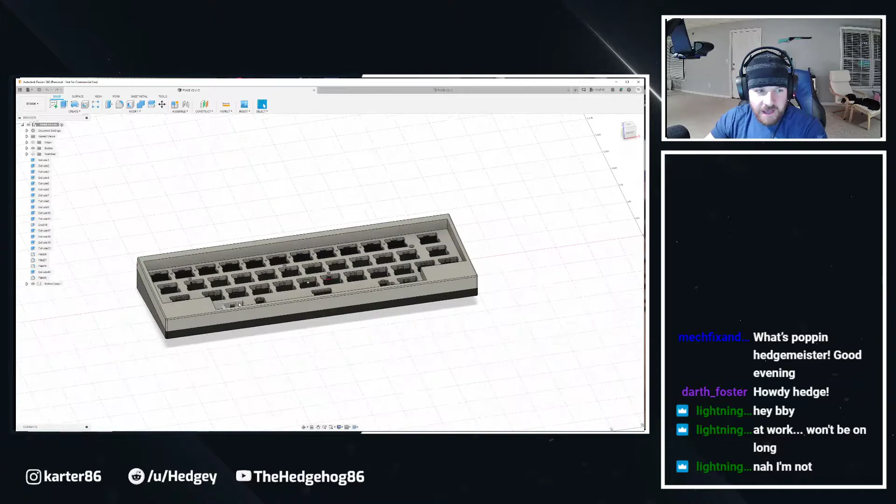So you can see I actually have the case I designed over the weekend, but the issue with this case is I cut off the 1U right here, and I didn't want to now that I look at it, at least not for now. And Fusion doesn't like playing on a curved surface. It won't let you model or design on a curved surface, so it creates issues when you're trying to do more stuff to the case. So I think tonight we're gonna start from scratch again, but I have all the measurements, so it should be relatively quick. I'm gonna show you guys how to extrude, how to do all that fun stuff relatively easily. So we're gonna start fresh.

We're gonna upload. Actually, I should have it in the admin project, I think. Got a bunch of stuff in here. And I believe it is this one. Yep. So all I did was take the jet van plate and modify off it. As I said in the chat, this is an integrated plate. So I literally took what we already had and started working off of it.

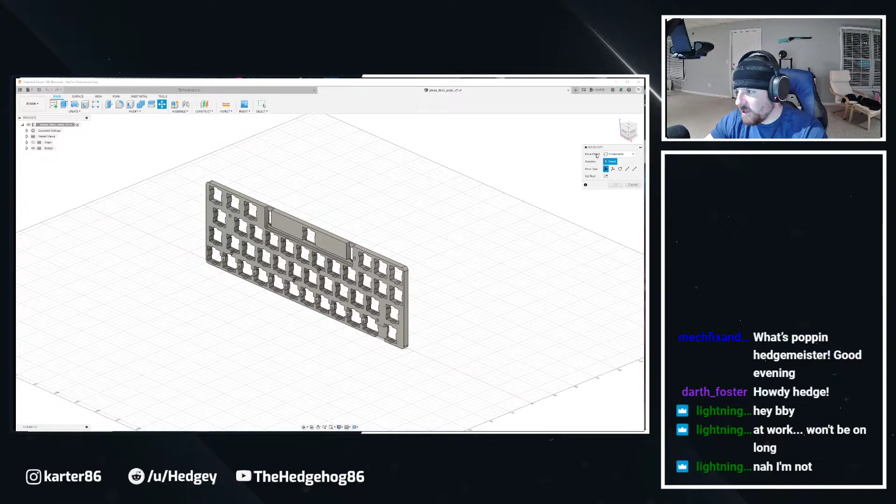So first thing I want to do is move this. I just realized I opened this as an editable document. Let's close that out, that's fine. We can always rename this, but the first thing I want to do is select the entire body, and then I'm gonna move it. We're gonna move the body. There we go. We're gonna translate, I think. No, first we're gonna rotate, that's right.

Right, so actually I can rotate, sorry boys, I can rotate off the bottom. So let's do it off there. There we go. Oh, wrong way. Oh, but it translates wrong. How did I do it last time? Did I do it from the top? I must have done it from the top. That's alright. Then we can move this flat. Okay. So I've got this floating design, okay, now we're gonna translate.

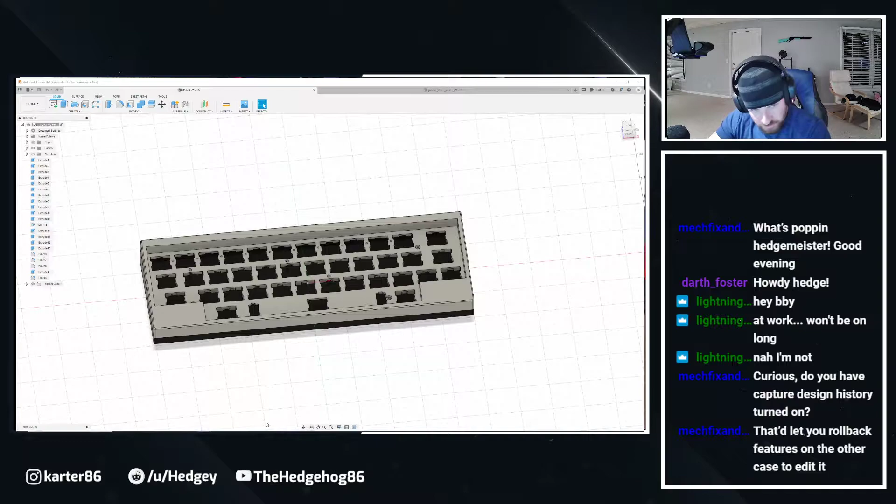I should be able to put this down. Curious, do you have capture design history turned on that lets you roll back features? Yeah, I do. I don't remember how to pull it back up, so what's funny is you'll see it start showing up in here, but thanks for the reminder on that. I meant to do that earlier. Because I can still edit like on my other one. You can see all my extrudes here. All my sketches are here. It's just not putting it along the bottom. So I gotta remember how to do that. I'll do that in a second.

This is almost there. M for move. Take bodies. Let's go. God, trying to get this right is a pain. There we go. Let's go -1.5. I think that's it. There we go, that looks right. Nice, we have it on the ground. Oh, look at you, MechFix.

Yeah. Can't remember how to do that. Actually, this is a good reason to pop over. Sorry, you can't see it. It's on my web browser. Fusion timeline missing. Which, by the way, Google obviously is the ultimate help when doing this stuff. So if you get into this, Google is the best thing in the world. So option capture design history. Interesting. Looks like it's here. There we go. Design history. All right. See, Google solves all.

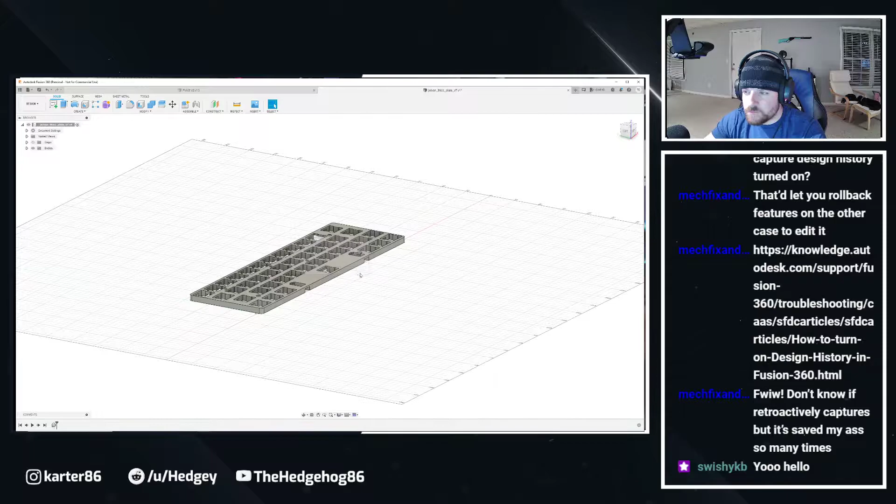So we just started. Just brought in the jet van plate, and like I said, I've got some measurements, so I'm going to work off of those measurements more than anything. And one of the first things I'm going to do is obviously save. I don't want to save the plate though. That's right, I can always pull in the plate later. So this is supposed to be V3. Yeah, I'm good, Swishy. PC, PV, KV, V3.

I am actually excited. I am headed to Dollywood tomorrow. So that should be exciting. A little roller coaster action, getting up early, driving up there with the pops. Should be a lot of fun. So,

All right. So we got the corners to lead off the plate, or the fillets, I should say. Like I said, I've got my measurements here. These were all handwritten this weekend. I know roughly how big I want the case. And like I said, I've already 3D printed the top. And for the most part, the top fits. There's only a little bit that doesn't work right. Here.

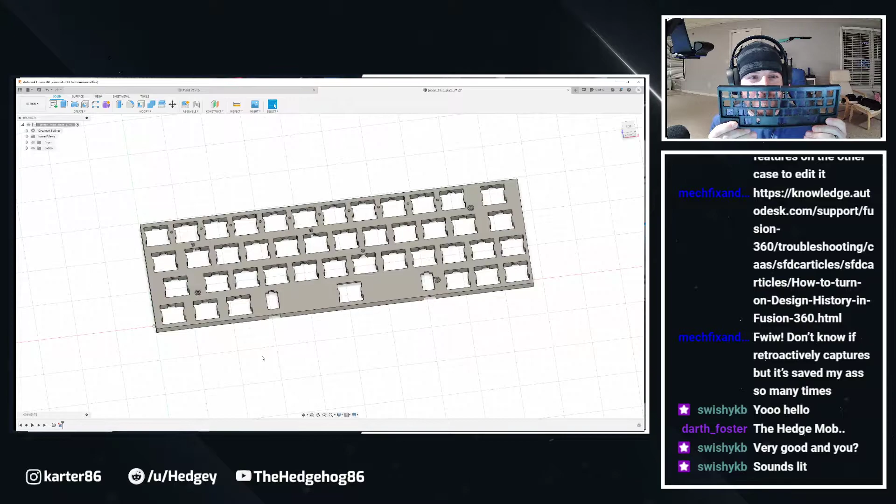And again, apologies if you hear the 3D printer in the background, if it's loud. It's been running 40 some odd hours now. But because the Ender 3 isn't big enough to support 12U or larger layout, I had to split it in half, so I printed it like this. But I've got the curve going the way I want it, which is very HHKB-esque, right? I think I posted a picture in Keyboard Design that I was looking to make that same curve.

So my issue is that this last weekend when I was designing, Fusion doesn't like working off a curve. So the very last thing I'm going to do is do the curves and use a tangent arc with 3 points, which once I figured out how to do it that way, it led to, okay, now I know how to do it as an overcurve, which means some of my other designs that I've been struggling with are all coming together a lot better, which is super exciting. So now I'm really kind of grasping a lot more in Fusion. There's still a lot to learn, but I can get by on the basics, which is great.

So let's do this. Which, I should ask if you guys want the hand cam as well. But now we want to start extruding, and that's all Fusion is: extrude, extrude, extrude. If you don't know that, start with a square and keep extruding.

So I know for a fact that on the left and right side of the case, I need at least an additional millimeter of room for the keycaps between where I start extruding upward vertically for the case. So if I know that, and I know I want the side bezels to be 3.5 millimeters each, we're just going to extrude 4.5 millimeters, and that'll bring that part of the plate out. You can see the difference there. And then I'll do the same thing on this side. So E for extrude, 4.5, perfect.

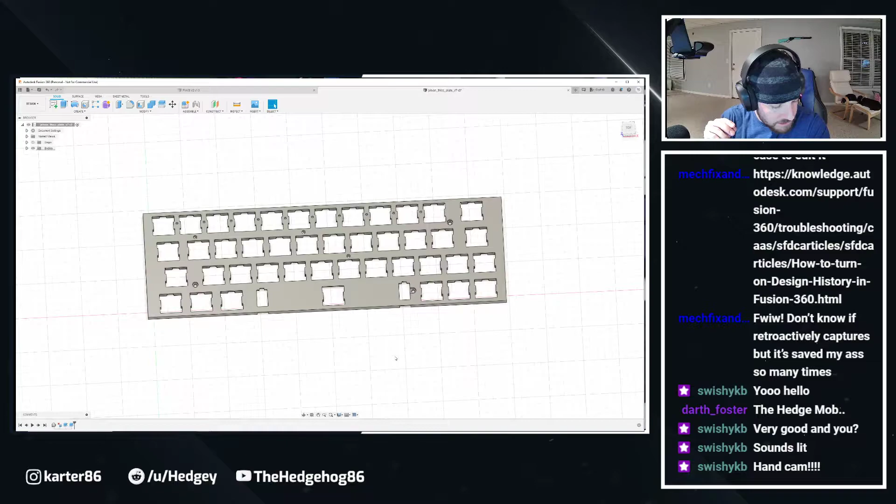And again, this will allow me to create a line back 3.5 millimeters, and I can raise the case from there. Total case height, the back of the case should be about 32 millimeters, give or take. And then the front of the case should be somewhere around 18 millimeters. So it's going to be like a 5-degree angle. The HHKB is 7 degrees, I believe.

Hand cam, he says. All right, let's see if I can do that. Bear with me here. Let's do this so I can move things around. So we'll take the Logitech cam. I'm going to shrink it down here. We'll put it right there, and let's see. I think I have to move this above monitor 1. There we go. Nice. So you won't be able to see the mouse, which I guess the mouse is what you guys want to see. There we go. How's that look, Swishy? Is that good? So you can kind of see everything.

All right, so we've got the sides extended, and I believe I did the same thing for this other case. So what I can do is do a measure, even with the fillet, that's fine. So we're going to click S for search, and then measure, and then I'm going to measure from here to, well, that's not going to work. Let's try this again. Awesome, perfection. Glad you're happy. Yeah, 4.068, and that's angled down, so it's 4 roughly. So okay, we can go back to my other design.

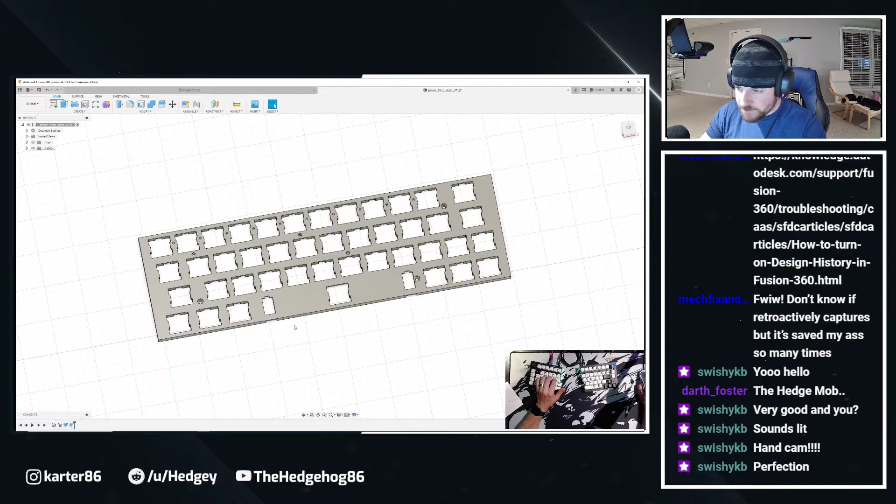So we know the front, I made 4 millimeters. We're just going to go ahead and extrude this out. 4.5. I think it's 4. Did I say 4.5 or 4? I think it's 4. Because that was at an angle, which means it should have to reach a little further. So, all right, it's 4.

Now I probably don't do this the right way, but I want to create the bezels and bring them up. Like I said, the very last thing we're going to do is draft and then curve the case. So realistically, I'm all about the bezels right now, and then we'll work on the bottom case right afterwards. So I'm going to click this body, the top face, search, sketch. We're going to create a sketch. Let it load. There we go.

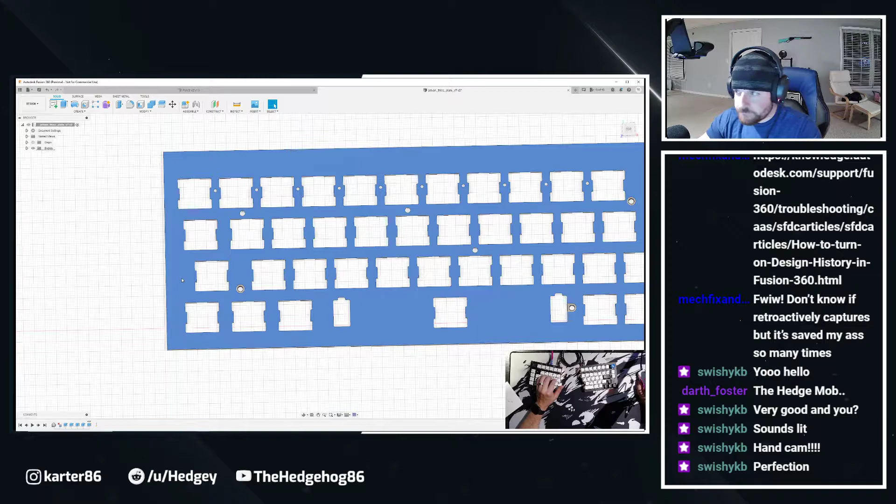All right, so the first thing I want to do is search. We're going to do a line, and like I said, side of the bezel, 3.5 millimeters, so 3.5 to there. Then we're going to draw a line up, 90 degrees to the top, and then from there to there, and there to there. Now, what I could do as well, and I will here, is I can knock out all the sides at once. I don't have to do one at a time.

So I'm going to go ahead and click this, and like I said, the rear bezel, we wanted 9 millimeters. I made it 10, so I had a millimeter of space between the top of the keycap and the bezel itself. So we'll come down 1 millimeter, click, and now we'll go right across 90 degrees to here. Perfect. Same thing, 3.5. Click. Bring this down. 9 millimeters, right? Oh, I went backwards.

All right, so here's the beauty in Fusion. You can always undo. And undo one more time. I was thinking backwards. That happens a lot. So line, we're going to go 9 millimeters. That's right. Not like the gun. And then click, and then we're going to come across 90 degrees. And it'll snap to rotation, 90 degrees, 180, whatever it is. It'll snap to that, which is awesome. So again, here to 3.5.

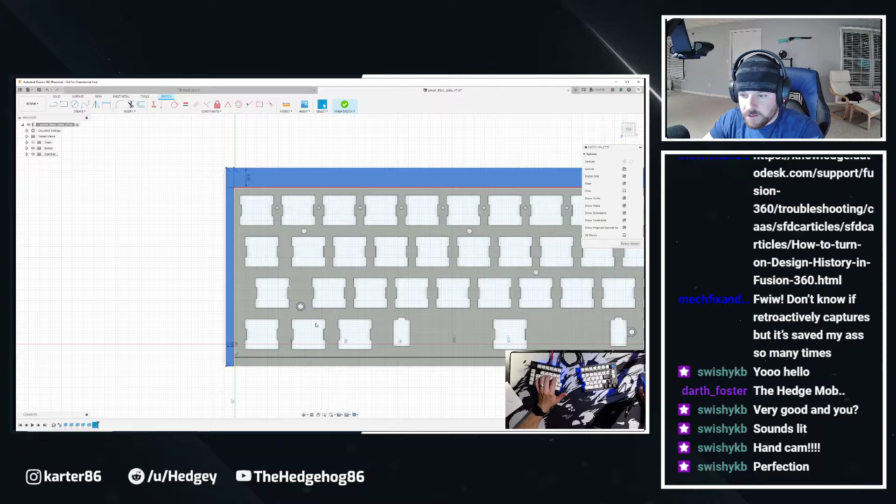I can basically click, hold shift when you want to multi-select, here, here, and here. Oops. Sorry, boys. Rotation gets a little funky. And then we're going to extrude upward. And I said the total height was 32 in the back, but I already know that the plate is 5 millimeters. I know I need the top to be 11 millimeters. So we're going to extrude 6 millimeters high.

And I think 6 worked. I can always go back and check. I had to do some additional calculations, if you will, here, but let's just double check. This is why I keep this one open. Yeah, see, so it'll be a little higher when I'm done with the arc. I think I did 2 millimeters up, but either way, we can start with that.

And I know that this height with the case as it sits right now is pretty close. I probably want that more to 7. So we'll change that when we get to that point, but it's always good to have reference material. If you have it, you can always measure and go back. So for now, I'll probably just go ahead and extrude this up one more millimeter. And we'll just have 7, and that'll be good.

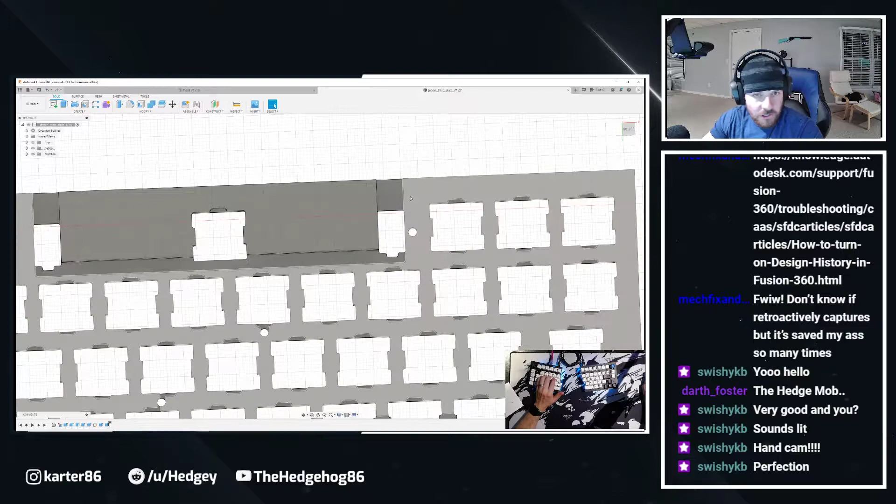But look at that, already there in just a couple of steps. I've got my integrated plate, I've got bezels, and that was super simple and easy. The nice part too is it's already got the USB cutout. We're gonna delete this switch plus these two because we're going for the HHKB look, right? It'll be asymmetrical, which is kind of the goal. And then what I'm also gonna do here is draw a line and close up this basically, so that there's no hole in the front of the case. So I'll probably go ahead and do that now.

So we're gonna click here, sketch. We're gonna create a line. Oop, yep. And then I said I extended that front of the case was 5 millimeters, so we can bring this back 5. That should fit. Let's give it some wiggle room just in case for the stabilizers. So 4 millimeters, come across. And then we're gonna do the same thing over here. Oops. I think I can only do one at a time.

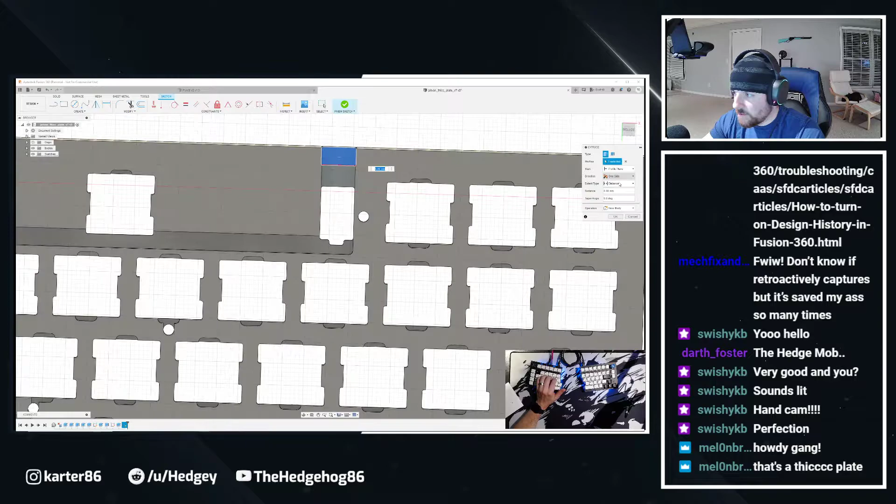Okay, and then we're gonna escape. And then extrude. Extend type to object. Let it load. Yep. Hit enter. And look at that. Now I've closed off those. I've still got room for the back of the stabilizer, but I've closed that off, which is awesome.

So now we're going to get rid of this switch. There's a couple ways to do this. I can literally just straight delete this, but here's the issue with that. When you start doing that, you got to work around the views and stuff. So the other problem is you have to select all the faces.

I really should try a trackball with Fusion. I hear it's awesome.

Oops. All right, so it should be like 18. So right click, delete, boom, closed up, perfect. Oops, sorry. Yeah, oh my god, the rotation gets a little wonky. Sorry, boys. So yeah, so there we go. We've already got that one completed. I'm gonna do this same thing for this other switch right here, because that's what I've got going on in the design.

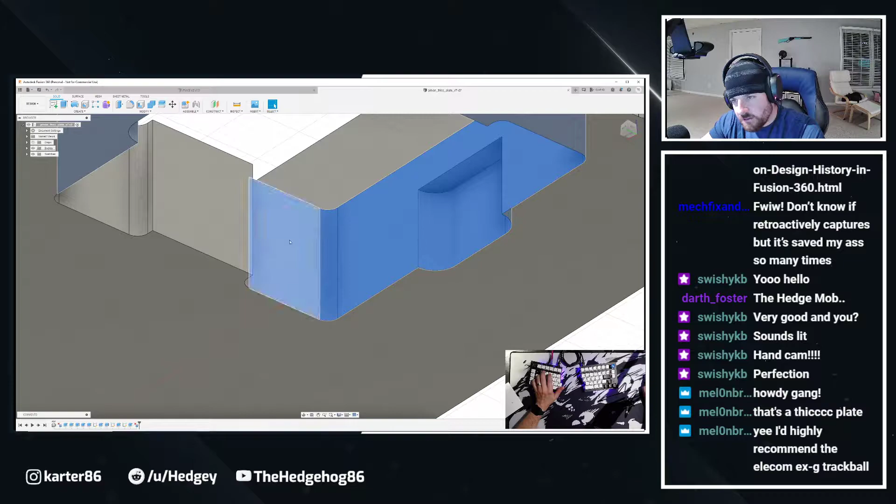Oops. Whoa, yeah, how do I make the Elecom EX-G trackball? Right now I've got upstairs at my work computer. There we go, I've got my Perixx, the 720. It's a thumb trackball, super nice, wireless. I actually really like that one.

Couple more faces to select, and then we can delete all this, which is awesome. Like I said, I've been doing this design all weekend, so knowing what I want to do here is super helpful.

What I really need in here is Taylor to come judge me. Just create some unnecessary pressure, you know?

Look at that, perfect. Okay, so as it sits now, this is how I have the layout in the KLE, but not how I have it in the renders on the interest check channel. So gotta tweak this a little bit, or tweak the renders in the interest check channel. But hey, it's all good.

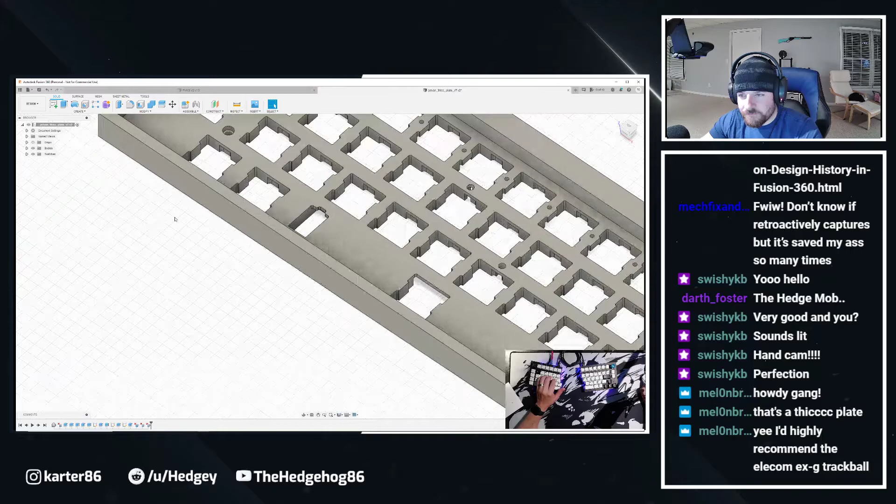So now I want to create some blockers and get those knocked out. At least I think that's what I want to do. The other part is doing the case, the bottom of the case too, but we'll get to that in a second. So again, I'm not modifying anything switch-wise, switch position. All I did was delete 3 switches.

All right, so we go ahead and sketch here.

Oh, my Braves are scoring again. Have any baseball fans here?

All right, so I know I have a millimeter of difference, but that shouldn't matter. So we're going to go with a line. We'll go 19.05. We'll go here.

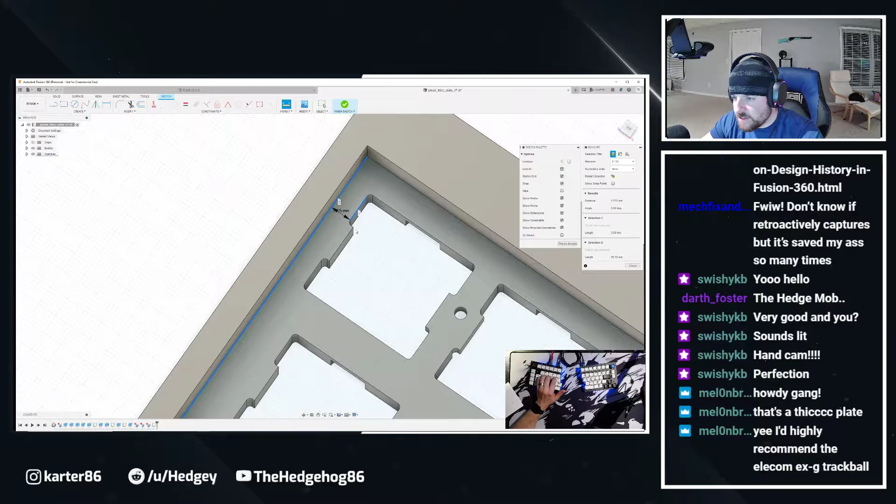Oh, this is where it gets a little wonky. Hold on, I gotta remember what the distance is between the switch and the bezel. So here, let's do this. Let's measure this line to this line. What's that say? 2.725, okay. So I want to create a line from here to 2.725. That should be the distance.

Okay, so now I should be able to take a line here. Oh, you know what I should do? Yeah, and if you guys haven't realized, Fusion is literally just drawing a bunch of lines. There we go, so that should be the first blocker. And I should be able to...

Oops, sorry. Should be able to take it to there. Click there, all the way to the corner. So what I'll do now is I will delete this line, I will delete this one. There we go, and now I have a blocker. And we're going to extrude, excuse me, to object.

Look at that, that looks like a good blocker to me. So pretty simple, and we'll do the same over here. So, sketch. There's a lot of repeating motions too in Fusion. So we'll take it from here.

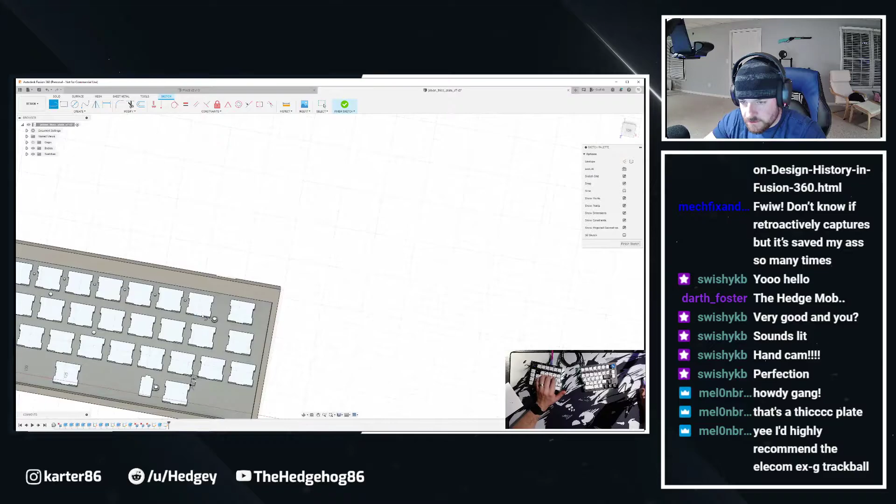I say 2.725. And then just bring this up just a little bit so I have enough. Okay, escape, line. Which point are we rotating off of? Alright, I'm struggling. Oh, okay.

Oh, and I still gotta move this over, I gotta translate it, I haven't done that yet. Alright, so here to 19.05. Okay, and then bring this to here, 90 degrees. Nope, that's 89, that's 90. There we go.

Down to there. Oh, it already has that as a... weird. That's okay, I still want to do one extra line from here to here. There we go, okay, let's go ahead and delete that. Extrude to object.

There we go. And you guys are quiet tonight, are you just watching and learning? That's about as asymmetrical as it gets, right?

Let me show you something. Alright. Just ripped my headphones out of my stand. So yeah, so...

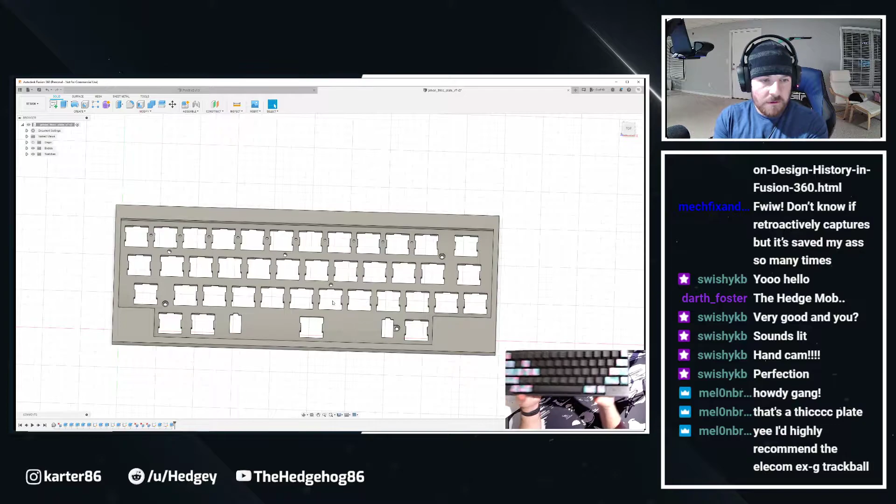Speaking of asymmetrical, sorry, harsh light, you can see the blocker here. Let me do it this way. This blocker is longer than this one, and then you'll see what I'm going for on the case. I'm going for that curved look eventually.

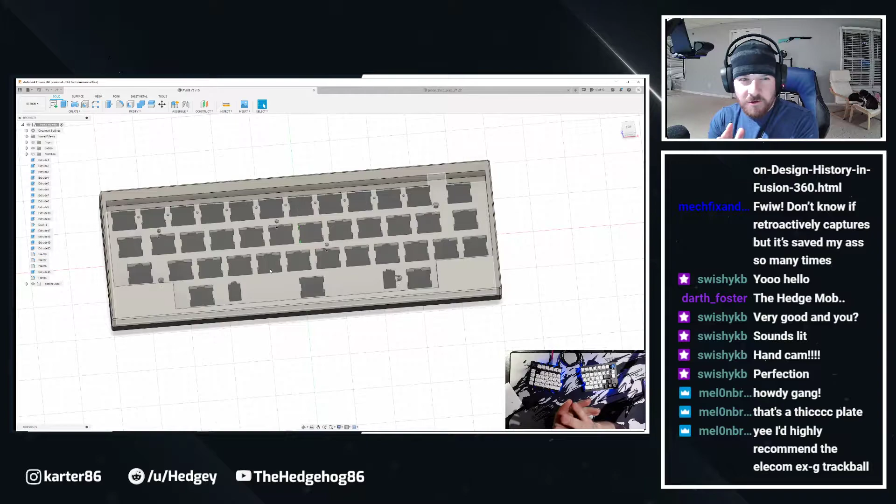I kept the screw holes the same size. I don't think it'll matter because it's an integrated plate. I actually don't think I'll need the screw holes to hold in the PCB, if they're held in by the switches. Someone correct me if I'm wrong, but I'm pretty sure I won't even need the standoff holes, which is nice too. It means the PCB won't be resting on standoffs.

I saw it. All right, let's create a new component. This will create under the main project. We're gonna call this bottom case, and we're gonna go from the body. Okay, we've got our bottom case started.

So what I can do now, I believe, is extrude. I'm just gonna start with this. I could probably create a line and go around and make a square, but I'll probably just extrude downward.

I know the top of the case is 11 millimeters at the moment, roughly. I think it was 12 total. That's it, I'm refunding my oceanographer. Thanks, Swishy. So I know I want to get to 32 millimeters in height. That's what I came up with. So, some quick maths.

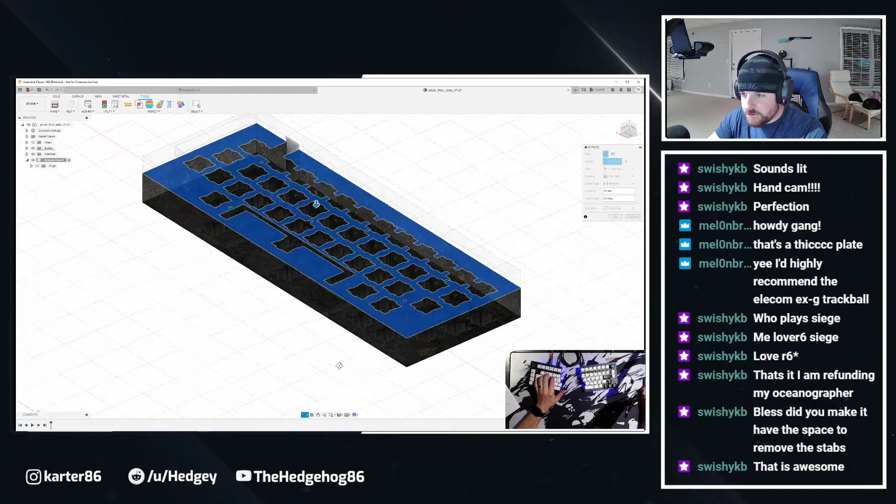Bless, did you make it have the space to remove the stabs? What do you mean, like right here? What did I say, 21? Yeah, 21. Ugh, I don't know why it makes that material not the same, which is so weird.

I hate the way that looks, that's so strange. Oh, and I still gotta move this thing over. Well, I guess it only matters if I want to print it. That's also why I can't rotate around the center very well. So let me do this.

Physical material, let's pick. We'll pretend it's metal for now. Like if I unscrew them, can I just remove it? I don't think so, I may cut holes to do that. It's just perspective, you were looking at it from the bottom, Swishy. So I would need to cut holes in the top to be able to pull it out. But that's not a bad idea, actually, now that I think about it.

I may do that, I may make a hole big enough for the stab wire to come straight out, because I don't think there's any downside to that, even with the integrated plate. So let me do that. But let's pick a material real fast. Let's just go with... it won't be aluminum, but the plastic doesn't seem to work very well. Let's go with the classy silver.

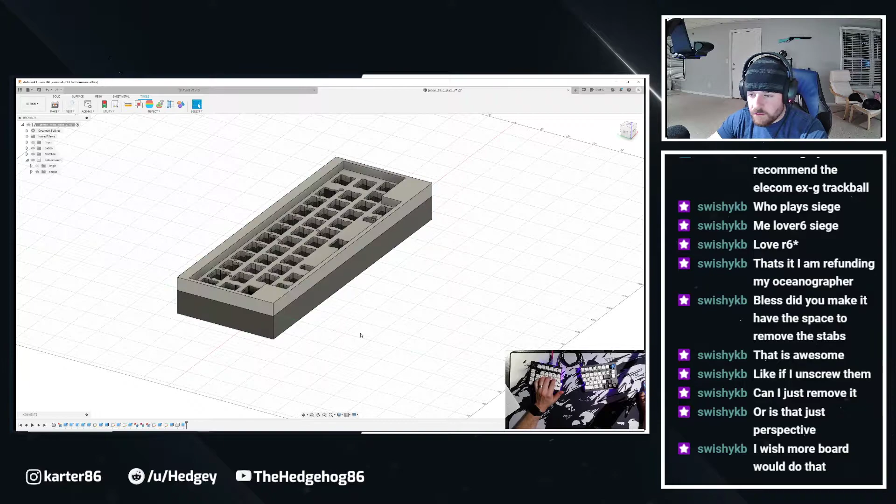And same thing for the bottom case. Close, okay, and it should... Yeah, I don't know why Fusion's been doing this, it makes it two separate colors. Can I just remove it? You could, or what I could do is go ahead and extend this. Extrude that right through, let's do that, let's come up.

So, I see what the problem is. Coming out with that switch, I have a better idea. So let's Control Z, okay, I have a much better idea. I think the stab, I gotta know where the stab wire goes, but what I'll do, Swishy, is create from where it comes out a little bit and across, a line big enough, or a hole big enough that the wire can come out. That way we can still clip in the switch, right? That's the issue, we want to be able to clip in the switch. So, and I agree, I wish more boards would do that. You can do it with the Ocean, I think, we cut the plate hole big enough, I believe. Which my poor Ocean still isn't built yet, I have no working oceanographer at the moment, not even the PC one.

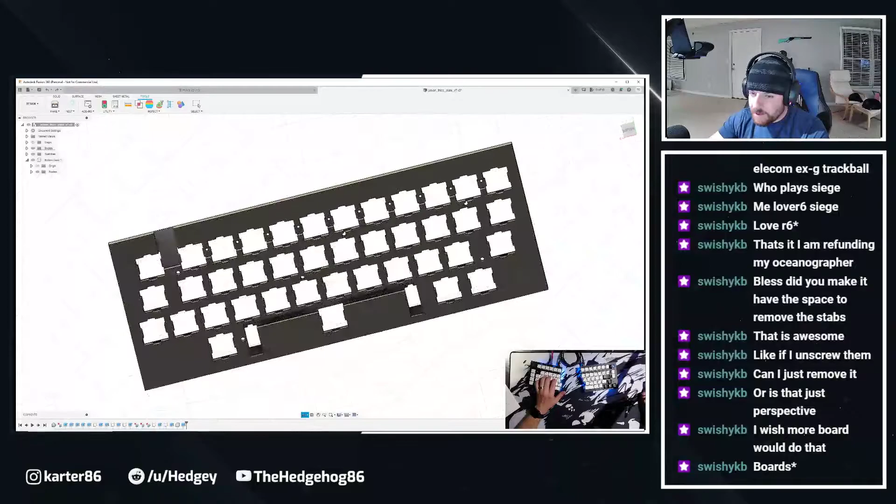So, all right, bottom case. Now we gotta do the fun part and close up all these switch holes. And the easiest way that I did that was sketch.

I'm going to go ahead and hide the main body from the top so you can see what I'm doing, okay? We're going to create a line here.

I need to remember if it's from the top here, but let's just start from here, doesn't really matter. Come across to there, and now we're going to travel upward. The switch holes don't matter. Come back down.

Hey, I love you, you doing good? My wifey, everyone, she's over here. You don't want to say hi? Okay, alright, I'll see you in a little while.

If you have a significant other, make sure you tell them you love them all the time. It's super important.

Oh, I went way too far. That's okay though, we're going to come to here. Oops, hello. Actually, let's do this. There we go, that kind of works, right?

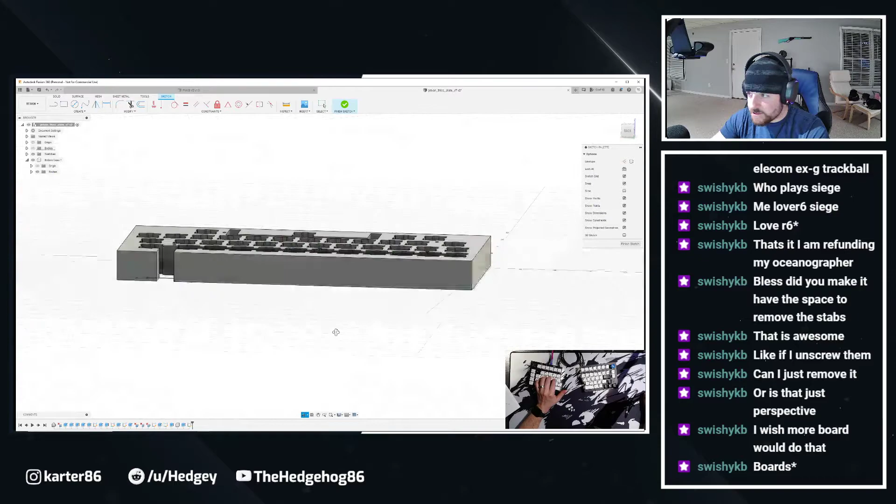And the beauty is, because this is the bottom of the case... which way am I looking at it? Oh yeah, if you ever get confused on your rotation, that's what it looks like. So it did flip me over, which is weird, and then this is more the top. So what I should be able to do now is escape, select this.

Did I screw up? No, I didn't screw up when this unfreezes. Alright, awesome.

Oops, sometimes it'll select the points. The only thing I really don't like about Fusion is the amount of times you have to click something. There's no way to say, oh, select all the switch holes. That doesn't work.

There we go, and now I should be able to extrude to object. Again, we're going to come to the top of the body.

Oh, I know what I did wrong. Oh my goodness, okay, let's try this again. It should be just these, that's my bad. I drew that line so unnecessarily around the...

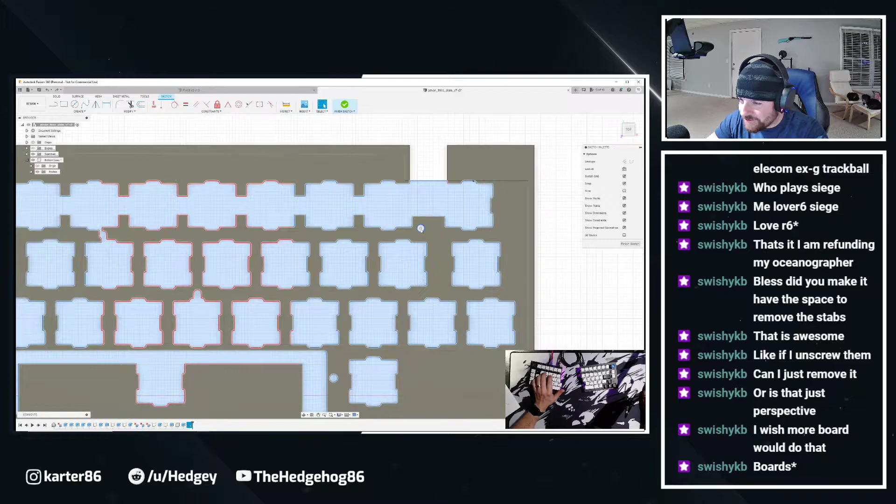Oh my goodness, it's a late night, boys. Okay, let's try that again.

Right, look, it's the bottom. Sorry, I don't mean to make y'all dizzy either, just trying to get my orientation right. Let's try again, to object.

That was funny, I don't know why my computer's taking so long to process some of this. It is dragging though. Wow.

Okay, there we go. So now with the body shown, I have a full case. And I know for a fact that I'm still going to need some space from the bottom down. I'll get to that in a minute.

For now, I'm going to go ahead and bring this hole up a little bit. So select the bottom sketch. God, a quick snap. Line here to here to here to there.

Okay, escape. And then again, like I said, all Fusion is extruding over and over and over. Let's make it 16, that'll give me

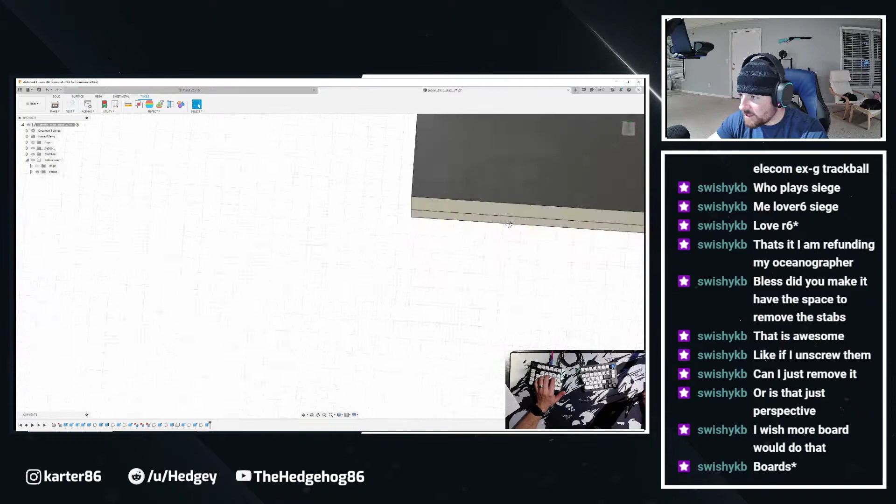5 millimeters space from the bottom. It's probably overkill for now, but let's flip this back over on its right side. There we go, look at that USB hole. Nicely done.

And what I'll probably do is cut out under there just a little further, just for the USB port, just so I have room. So overall that looks really good, and now everything's starting to come together.

So I'm just going to go back and reference my other one. Let's get rid of that body. See, so I think I made it a little shorter here. Let's go ahead and delete this just for the moment. Measure, because this is only the bottom case. Oops, I don't know what happened here.

Point 437, huh, that's a weird number. I don't know how we came to that. Okay, but now I can go back and check the height here.

Measure. Oops, that's not the right point. Is it? Yeah, it's the right point. 5, so we'll probably

extrude this down -2. There we go, a little large. We'll tweak it as we get there.

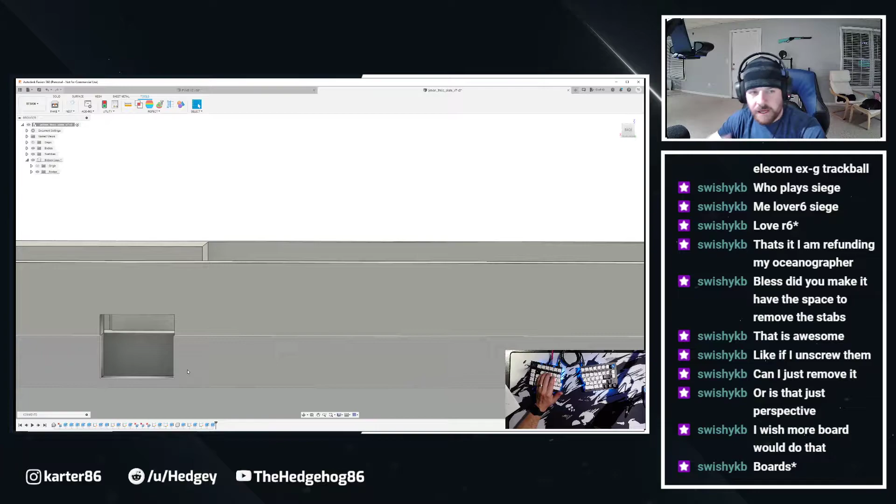I think if I remember correctly, it had to do with the drafting angle and then curving the case. That really did a number too. So there we go. Alright, so what else did I need to?

Don't want to angle. I don't think I need those standoff holes. If I don't need the standoff holes, I will be super happy. But yeah, let's just double check. What was the measurement on the back? Because this is with the drafted angle, but that's still flat from there to there. Okay, .5 millimeters. Which is probably a little too much.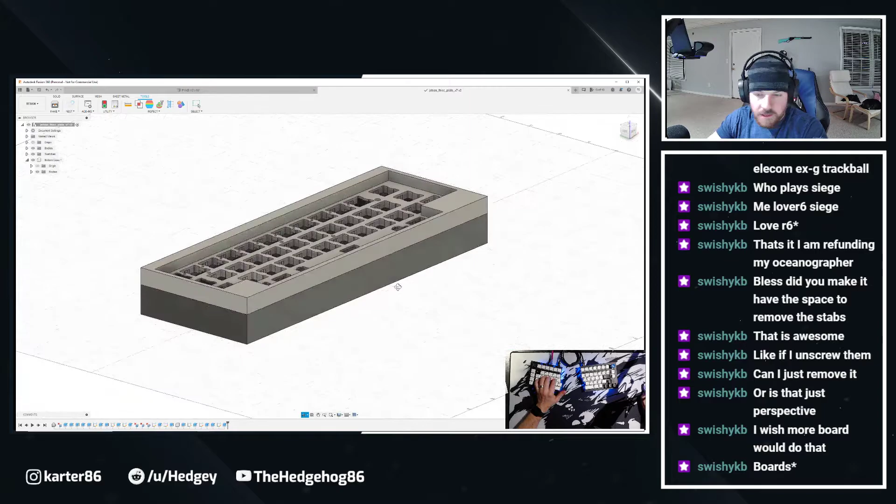And then we're going to show you guys how to draft. So S, draft. I want to pull from the front, I believe. And then I want to pull this face. Oh, wrong way, okay, hold on. So the pull direction is this way, and then we're gonna pull from this face right here. And I believe, there we go, 5 degrees. And I think the problem was going 7 was too much, as I want that to be like the original HHKB.

I believe after I did the cut to do the curve - although this looks okay, this looks like it's not going to be an issue, which is weird. What do you guys think? You think 7 degrees is too much, or do you think we should go and keep it at 5 degrees? I'm curious what you guys think, honestly.

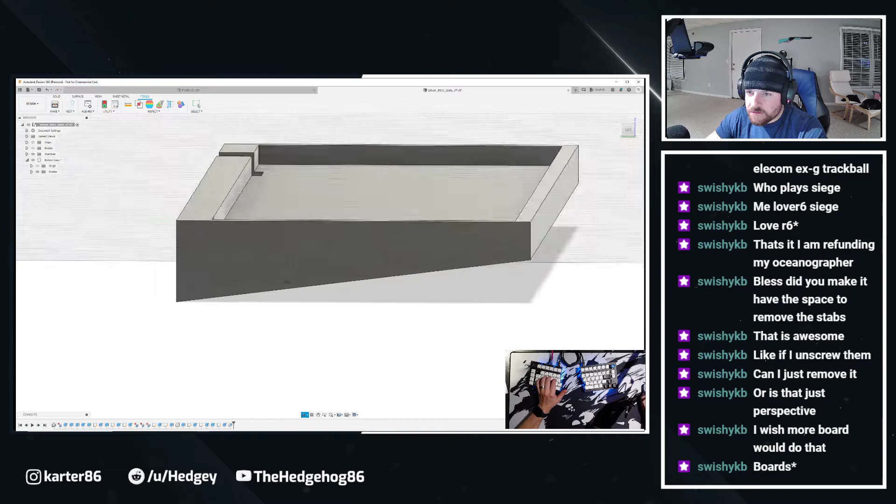Because this part of the case right here will actually come up a little bit, but I'm thinking I should keep this. I guess I can always change it. Let's go with 7, let's go an intense angle. What's it, the 7 if the OG is also 7?

Yeah, I agree, Arch. What's it, the duck boards, the Duck Viper and those other ones, they're the TCV3 or whatever, they're like 12 degrees, right? They're like break-your-wrist type angle. So yeah, let's keep it with OG, let's go 7 degrees. I think we have enough space between - yeah, we should.

Because this one was 5 degrees, that looks thinner for some reason. I guess there's an easy way to tell. Six and a half, okay. Alright, well, and how big is this one? 9.8 - did I screw up somewhere? I wonder if I got my measurements wrong somewhere. It's not the end of the world, especially with that angle - the extra height might actually be kind of nice.

So what I want to do now is view with the top bodies. There we go. And again, we're gonna curve everything, so let me just double check before I start doing anything else. I was gonna look at putting a logo right here. Do you guys want a logo on the board, like PVKB, kind of like the HHKB logo? It'd be milled in or whatever you want to call it - this is printed on, but let me know what you think.

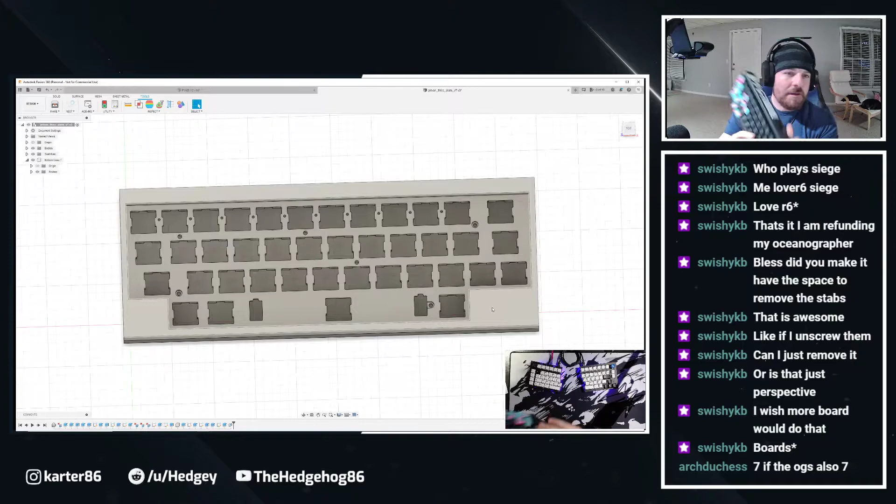I don't know if it makes it too tacky. I know the Daisy case, the HHKB case, did that, and a lot of people hated it because they put literally HHKB, like they copied the logo exactly, and people hated that. So I'm not sure. I think I want to stay away from the logo for now. You can always get a sticker or something if you want. But I think I'm going to stay away from that. So on the other board, I don't think there was much else that I needed to do.

Yeah, the Daisy logo was super... Yeah, and it's funny. Originally, Arch, I didn't like the V1 case. And then they came out with V2, and I was like, man, if you remove the logo, it looks super clean. But no. Oh yeah, I still have the HHKB Daisy case with the engraving. Yeah, it was too squared too. I actually prefer the older one now that I look back at it.

But the Tanuki also has that logo there, and I love it. Yeah, but the Tanuki was done right. It was a tiny logo. It's in Japanese. I actually infilled mine when I had it. I put some acrylic paint in there. It looked good. But yeah, I actually prefer that because it was just a smaller logo. Put a little recess on the back and ship it with a certified Hedgey sticker. That'd be interesting. Something on the back of the case, like right at the top, and just put Hedgey, something along those lines. I'd be down for that.

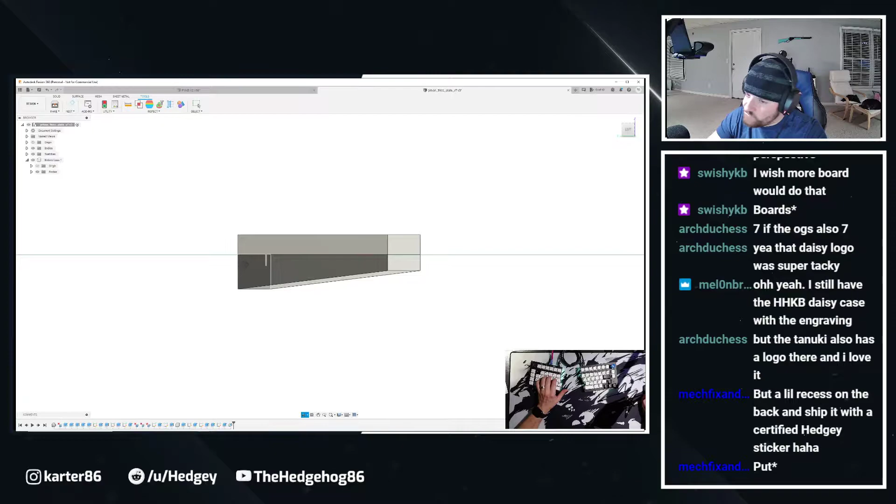I want to know why this whole case is so tall. I don't remember it being this tall. I may find out what's going on. I may have to extrude that up a little bit, but then I'm left with that weird ass gap. See, maybe I shouldn't have drafted it. And I can always go back, and the nice part is I can delete the draft. Why is this case so tall compared to this one? What did I do differently? That's so weird. Is it just there's a ton of material under here? That's too much material, right?

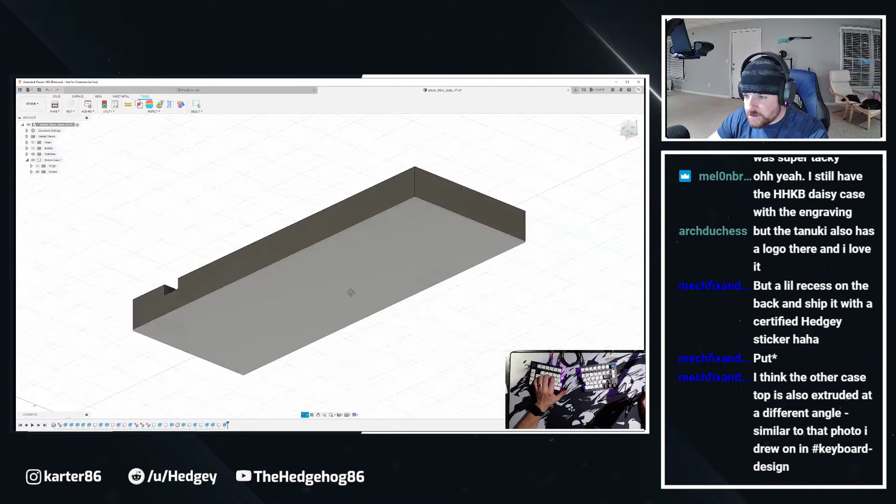If the total height as it stands right now is 21 millimeters, minus 5 is what? 16. So I've got 16 millimeters underneath there to play with that I don't need. It's just extra material, it's extra cost. What if I shrunk this? What if we extruded back, actually, hold on, let's do this. What if we just cut 5 millimeters off it? I wonder if I can still get away with a 7-degree angle.

I think that might have been the issue. That looks close. Here, let's do this. I remember there's a way to make the sketches invisible. Looks like it might be a little thin there. So let's hit OK for the moment. Let's measure. So technically that is thinner than the 5 millimeters underneath, and I put 5 millimeters as a safety for hot swap sockets.

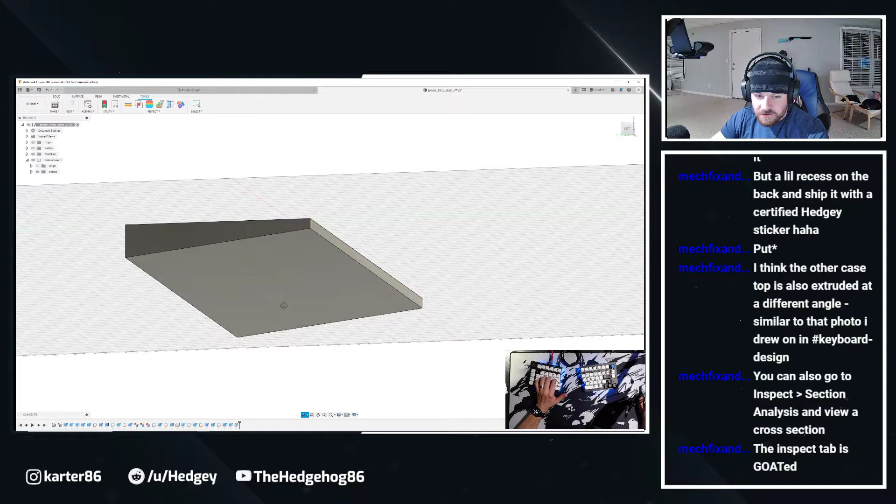Top case also extruded different angles similar to that photo I drew on keyboard design. You can also go to inspect, section analysis, and view a cross section. Thank you. I am glad you are here, Mex. Thank you, I appreciate it. You are goated.

So what did I make this extrusion? This was -5. Let's do 3. Let's just shorten it up a little bit. And I won't draft it for now because I know that's going to create an issue in a little bit. But okay, we pretty much have our case. I don't think there was a whole lot else other than starting to do curves and fillets and all that fun stuff. I'm like 99% sure. Did I do anything else on the inside? Because I'd moved some switches.

I do want to take care of the... I gotta remember where the stab wire goes. So maybe just cut out from here across and then here across. But the problem with that is I think it takes out the back of the switch hole, right? We kind of need that. Oh, I guess if it's going to be soldered on a PCB, it doesn't matter. It's not going to matter, I don't think. I would love to be able to remove the stab if I need to. And then I could always clean up these holes too.

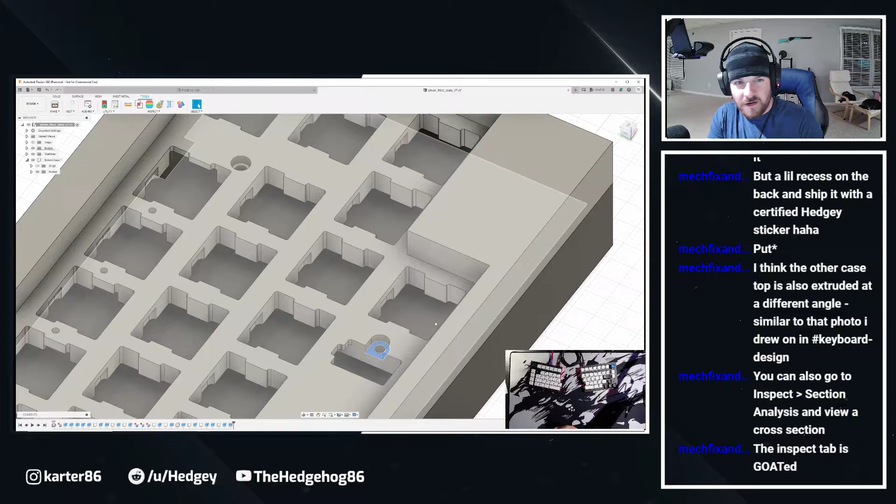Since it's a PCB mount... Technically, it's a mounted... Someone correct me if I'm wrong, right? If it's plate mounted, I don't need standoffs or hardware for the standoffs, right? I don't need that because it's held in via the plate, right? I mean, we use a plate on my other minivan, but it shouldn't matter because it's an integrated plate. Yeah, it shouldn't matter. Unless I'm losing my mind. Okay. Oops, didn't like that.

Actually, that'll make it a clean plate. You're correct, but it might be good to leave mounting points if you plan on a hot swap as an option. But even with the hot swap, like the Kailh sockets, it should still click, right? I just don't like that mounting point right there on where the stab is. It's... Alright, let's leave that one then. We'll be cool. We'll leave that one.

All those little joints are binding the switch to the plate and PCB. Alright, I'll leave them, but that means I would probably need to put something into the bottom of the case, right? Just don't hot swap.

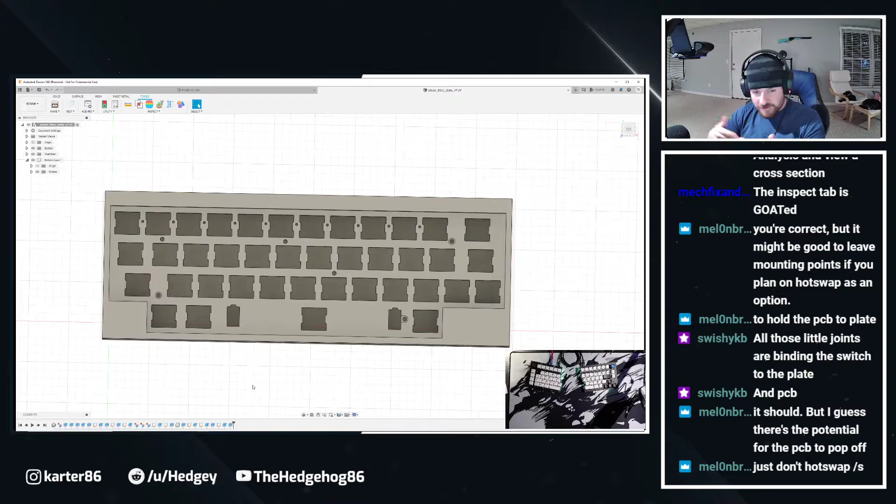Look, I'm a believer that hot swap has its place, but for as deep as we are in the hobby, you should be able to solder, and you should be able to desolder, and if you need help, there's people who have guns like me who can go and be done. Don't even get me started on that tangent, Melon. I swear. I'm not going down that road with you.

Alright. I don't think I want to do anything else to the top of the case in terms of design of adding a logo. We don't want to do that. Filleting everything is super easy, and I can do that after I curve. Let's make the curve the last thing I do. So let's fillet. Let's start doing that. I think I made these 0.75.

What is solder? Hi, yes, I would like to get a board. I think the GMMK Pro is what I'm looking for. I should not make fun of those people. It's not nice, Toby. Okay.

Get some nice little rounded edges in there. I don't remember what I made them on this case. I think these were... Mech, is there a way to figure out this measurement? 1.25. Okay, awesome. Cool. I don't want to curve this yet. I want to hit I. Okay, that's neat. That's good to know. So if I select it, and then hit I. Oh, look at you. I'm gonna invite you on my next design stream, and you're just gonna help me out. That's how that's gonna work.

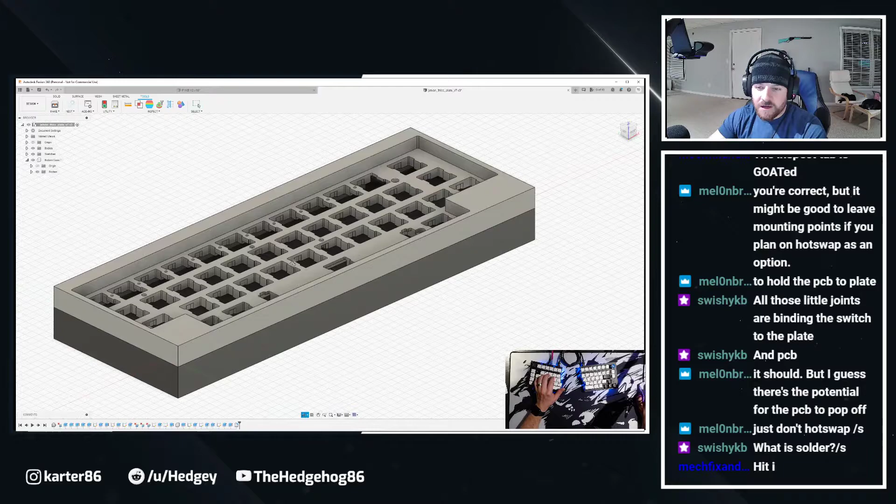I think I should curve the case before I fillet it, because if I curve it, I don't think it's gonna allow me to fillet in some areas, which is also a real pain in the ass. It probably will, because they're just edges, but all right, either way, let's do the tangent stuff, the fun stuff. Let's make sure I did this right. What did I give myself here? 7. And I said that the measurement here was... I'm glad I kept this drawing. 6.49. Okay.

Dog, what are you doing? Sorry, my dog is being weird.

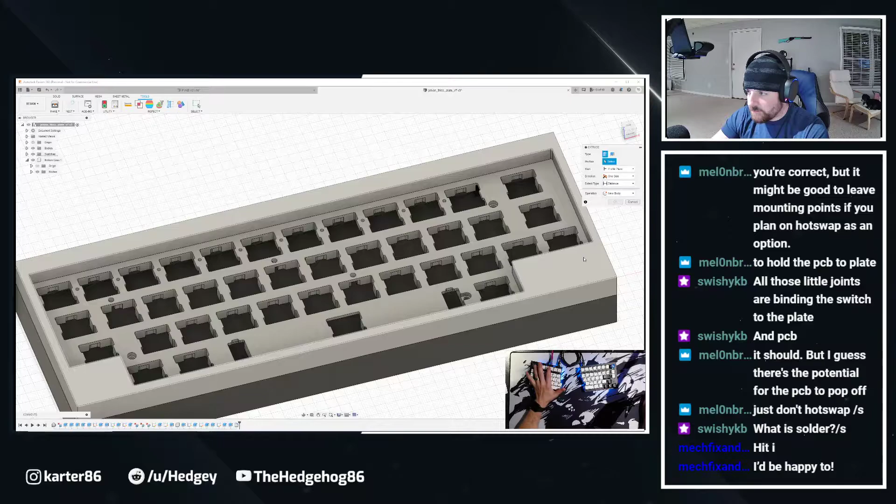Okay. S sketch. And the good news is I guess I can always delete this, right? So S tangent, tangent arc, 3-point arc. Oh, I forgot to do the, damn it, hold on. I forgot to do the line to give myself 2 millimeters. Oh, but that's why, okay, now I know why I had the extra space. Aha! Let's do this. Let's delete that sketch. Now I remember. We're gonna extrude 2 more millimeters. Now he remembers. S. Let's create a sketch.

Line. And Mech, if I'm doing any of this really inefficiently, just tell me, please. I don't want to be that guy. What's that distance? It's 14? It's a 14. That's right. Now we're going to go tangent, tangent arc, 3-point, and I believe I need to go from here to here. Yep. There we go. Nice little curve. I thought about making this a little more aggressive, but I kind of like the 2, especially knowing that the...

You can always right-click on a face or feature, start a sketch, or edit a feature. Thank you. Yeah, you're going to be on my next stream. I'm just going to do that with you. So we'll go ahead and finish, and then we'll extrude across. Hello. There we go. Oh man, this thing is laggy.

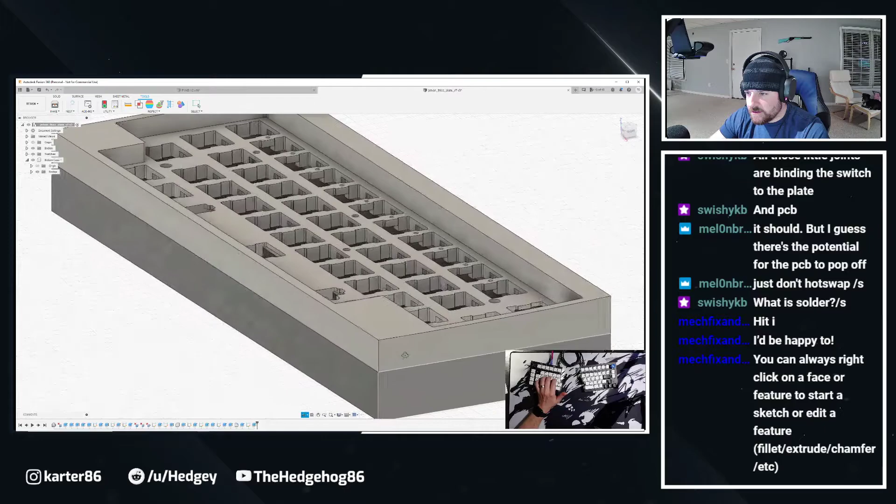Look at that. Curved. Nice. That looks awesome. Alright, I'll do those standoff holes in a minute. And so now we want to do the bottom. So, oh, look at that.

Thank you. Dude, Mech is killing it tonight.

2 millimeters. And I'm going to follow the same curve, because if you look at the HHKB, sorry, I have backwards camera. The curve is literally identical for the top case, and then we'll do it. Now this I think is a little more extreme. When I put it up next to what I've created, I know you guys can't see this. It's close. I think that the HHKB is just a hair more extreme. Probably like a 3 millimeter curve, or however you want to describe that.

But I think the 2 is nice, especially because we're shrinking the board. I feel like some of the dimensions and things have to shrink with the board. At least that's my belief, so. Tangent arc. Go here. Oh, 3-point arc, excuse me. And then come to here. There you go. The only time it changes is if I want to drag it down, but that's funny if I want to go like crazy. I'll go there. Cool. And finish.

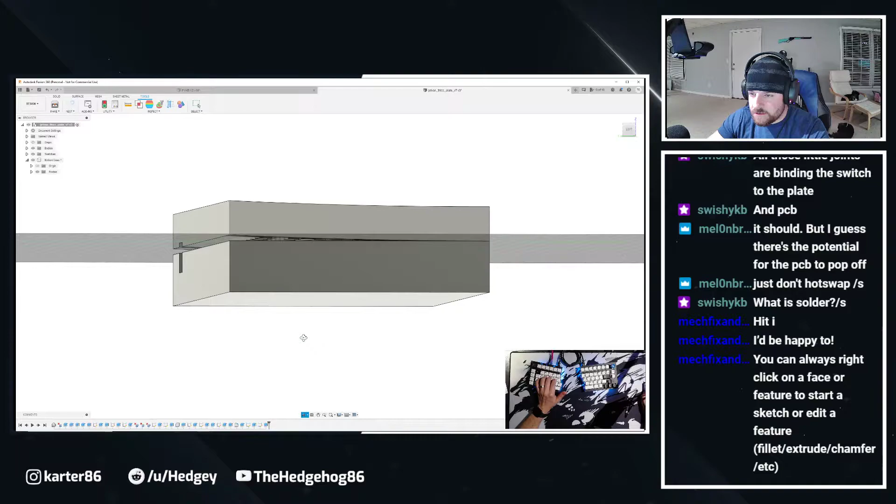And now we're going to take this, and we're going to extrude across. Oh no, Hedgey! There's a gap in your case. Oh no! The good news is when I printed this morning, the top switches still fit, even though we've cut into some of the switch plate, so that's no big deal. And now, right click here, create sketch, line, 2, perfect. And then we're gonna escape, S, tangent, tangent arc, 3-point arc. Easy peasy, lemon squeezy. Look at that. And I should be able to finish sketch, extrude.

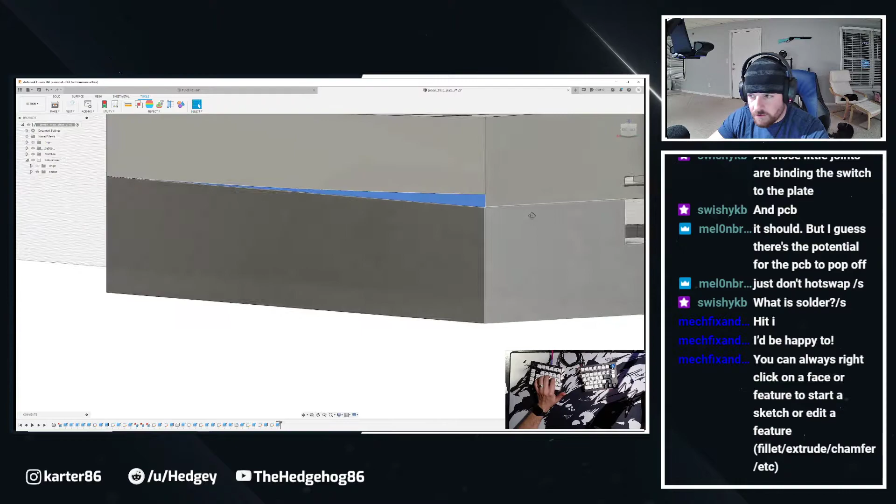Hello. Oop. Oh, jeez, it will not let me zoom out. I don't know if my scroll wheel's gone bad or if it's this, but whatever. Okay. And we'll fix this here in a second. Cool. Look at that. Why has it got the line there, though? What am I missing? Did that not come through all the way? It did. Mech, why do I got the line there? I shouldn't have that, should I? Let me undo that. That was a weird extrusion. I don't know why. To object. There we go. I think that was Fusion being weird.

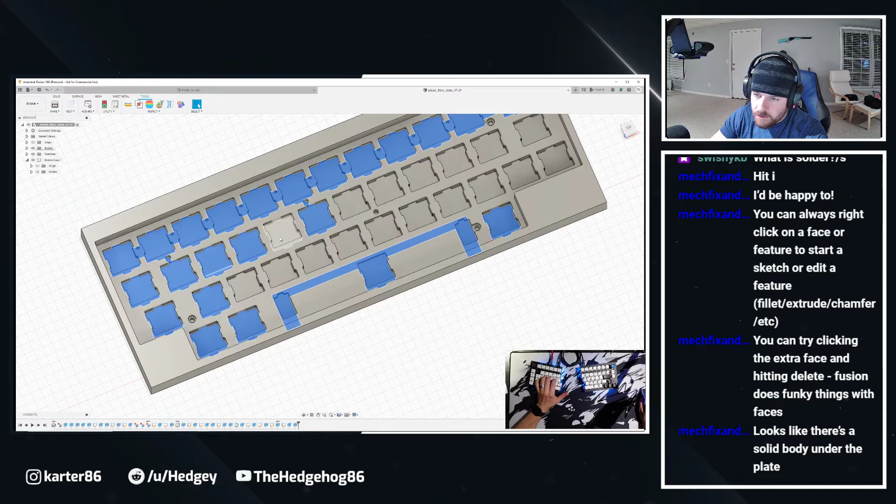Yeah, I think I know what happened. Yeah. Huh. That's so weird. See, this is why I don't like messing with those curves. So let's do this. Let's go back to, which one was that? Curved extrusion in 2 parts. So that was the first one. This was the second one. This is where... That's where we had the issue.

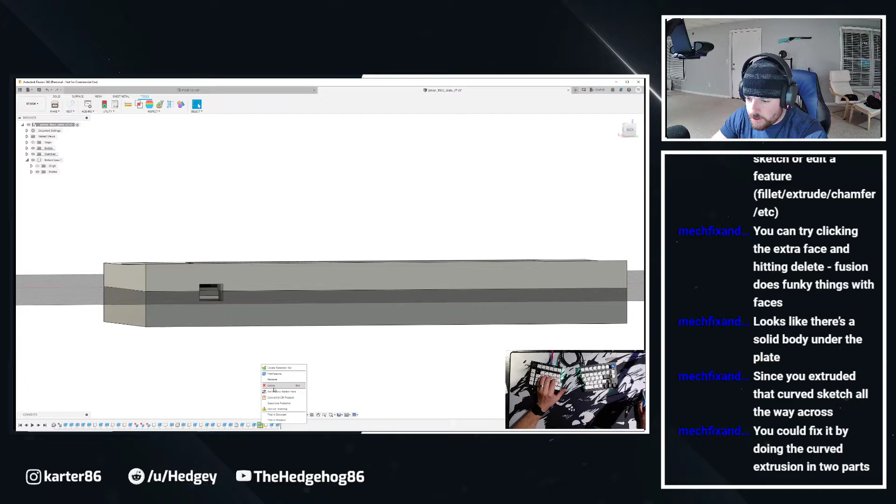And it happened with that one too, right? With that sketch. Yep, I want that one gone. Yeah, that's where it happened. You're right. You're right. So let's hide, actually we can still do, let's hide this body. And then we can still do the curve here.

And I see what you're saying. So what happened was when I did the extrusion for here, it pulled whatever to the top. Okay, so now let's create sketch. Oh, undo. Let's create sketch.

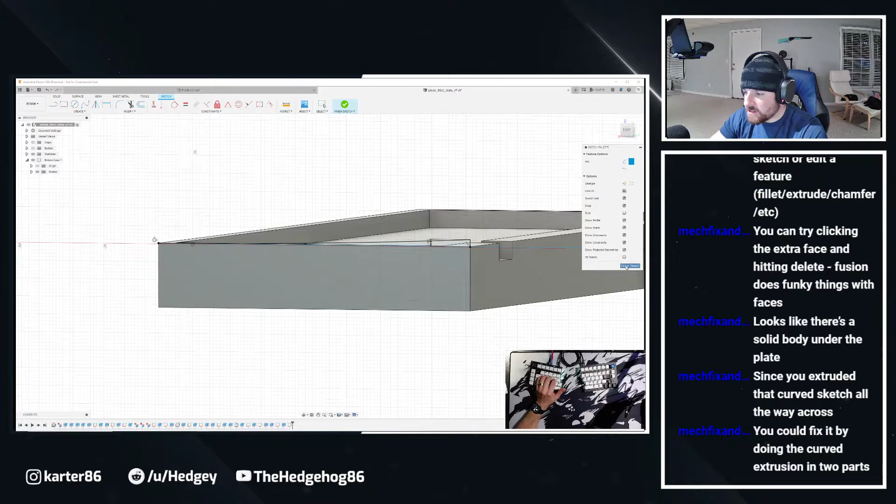And I see what you're saying. It's going to create that solid the whole way across, which is not what I want. Okay, let me go backwards then. Let's do this. Let's delete that. Let's outsmart the program. Sorry. Cancel. Let's extrude 2 millimeters. Thinking with our brain. And then I'll only have to get rid of that top part there.

So come down 2 millimeters. And then S tangent. Yeah, well, is that 2 millimeters? How do I make sure that it's...

Ooh, thunder outside. Okay.

Oops. Huh, so it does change it. Okay. There we go. And then we can finish sketch.

My poor dog is freaking out under my feet right now.

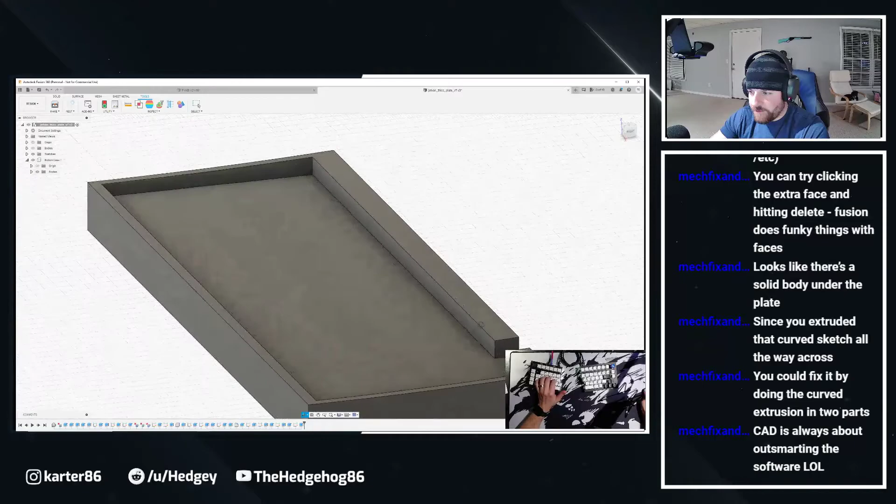There we go. That should be correct. I should be able to put this body... Look at that. There we go. Uh-oh, something's not right here. That's okay. I can join these, right? I think I can join the bodies together. I don't want to do that right now. Some measurement got a little funky. The angle didn't get... It wasn't the same, was it?

Alright, so let's undo that extrusion. Let's delete that. And let's redo that one more time. I don't know what happened there. That was weird. Sorry, I've been quiet. I'm sorry, guys. My brain is like stretching at the moment. Tangent 3. Oh, I don't have anything. Okay, I see where the issue is.

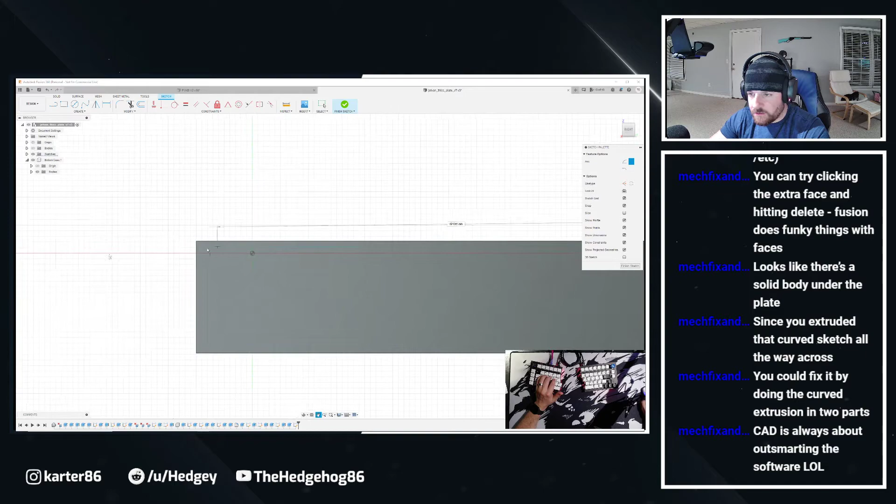So I can go from here. Problem is, it doesn't actually go on the red line. It goes 2 millimeters down. Okay, let's be smart. Is it 2 millimeters down? Yeah. There we go. There we go. Alright. Finish sketch. Okay, now I should be able to extrude that to the object, to here.

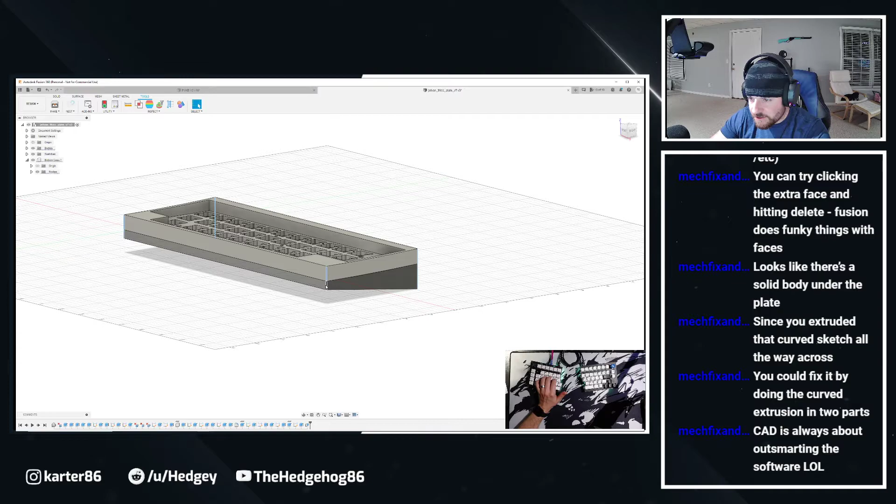And then if I put the body back on, hey, much better. As you said, Mech, it's all about outsmarting it. That's a good looking case. Now I'm comfortable drafting this. So, nope, we want this face, and then this one. 7 degrees. Okay. Man, that's a hardcore angle. Alright, I think we can start filleting everything. Wasn't too bad. What? An hour and change to get back to where I'm happy with it?

0.25. Okay. And then I believe you said I can click this and then hit I. And it'll give me the... doesn't give me that, weird. Oh, 0.75. Okay. Cool. So, click. Oop. Yes, I did the bottom two.

And again, I apologize, guys. I've been very quiet this stream. I know this is not always the most exciting, but at least you see how it's done, right?

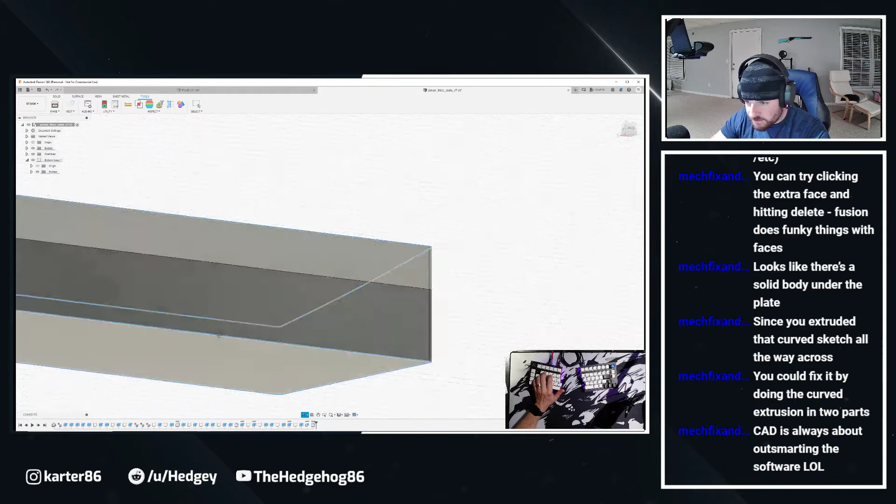.75. There's some nice rounded edges so we don't cut ourselves on some plastic. Let's do it the same, right? Let's do half. Let's just do 0.5 millimeter for the inside bezel, because I know that's ever so slightly curved on the HHKB. Mech, I do wish Fusion would let you select across, like, oh, I want to select all this line. I know why you can't, but... 0.5. It does? When I double click, it wants to select the whole body, though. Oh. So I'm just doing it backwards. Okay.

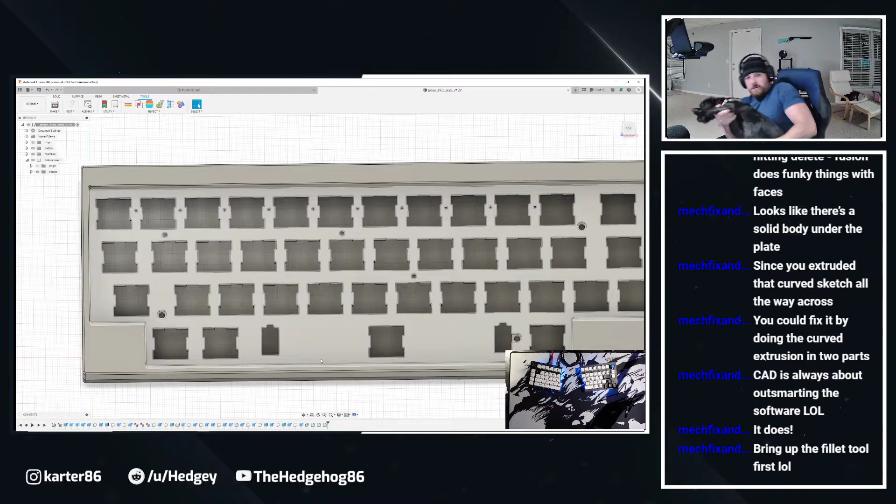Oh. Hey, Cece, come here. Come here. Ugh. One scared doggo. She is losing it. Sit down. Sit. You're okay. This is Cece. She's damaged. She's 8 years old now. Hates thunderstorms. Say hi, Cece. Say hi. And then my other one, William, he's back there chilling. But she'll hang out under the desk for now. She is not doing okay with this storm that's going on in the background.

Alright, so you said bring up the fillet tool first. Can I, like, double click, or is it just easier? Okay. Weird. As usual, sometimes it does, sometimes it doesn't.

Arch, you like the doggo?

Weird. Okay. Does that look funky to you guys, or is it just me? I mean, it shouldn't matter, it's rounded, but...

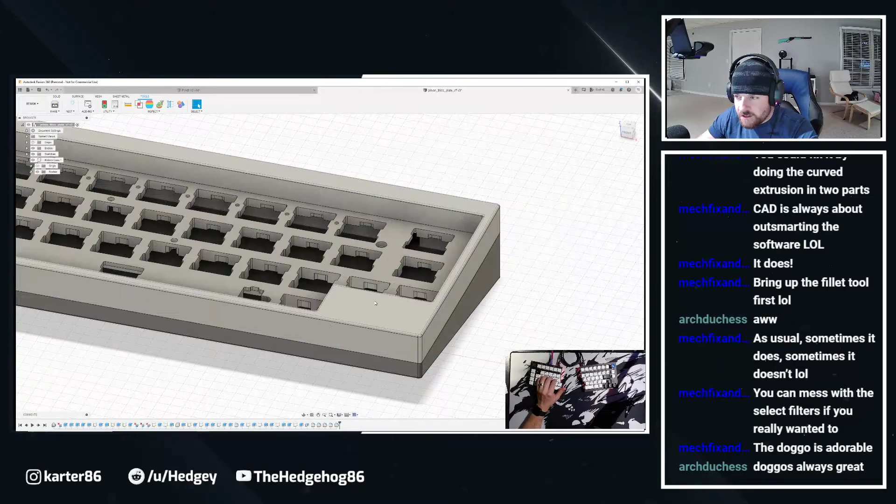Alright, what else do we need to do? Got the hole for the USB, got that, got the angle. Oh, we gotta draft this backside, which makes me wish I hadn't filleted that yet. That may be an issue. Which one was that? It was the first one, right? Second one. Did I fillet that a lot earlier? No, it's all this. Alright. We'll come back. We'll redo that one. But I want to draft this first, so...

And then I think we're going to pull from... What about a chamfer? That's probably the move, although... Does this look like a chamfer, or it looks like they drafted that angle? What do you think? Because the chamfer wants to do 45 degrees, right? Or can I change the degrees there? And this is why I should have waited to curve the top. I guess I can always go through and delete that again, but I really don't want to have to mess with that again. What do you think? I meant the USB port, but yeah, the back edge looks like a chamfer. Does it?

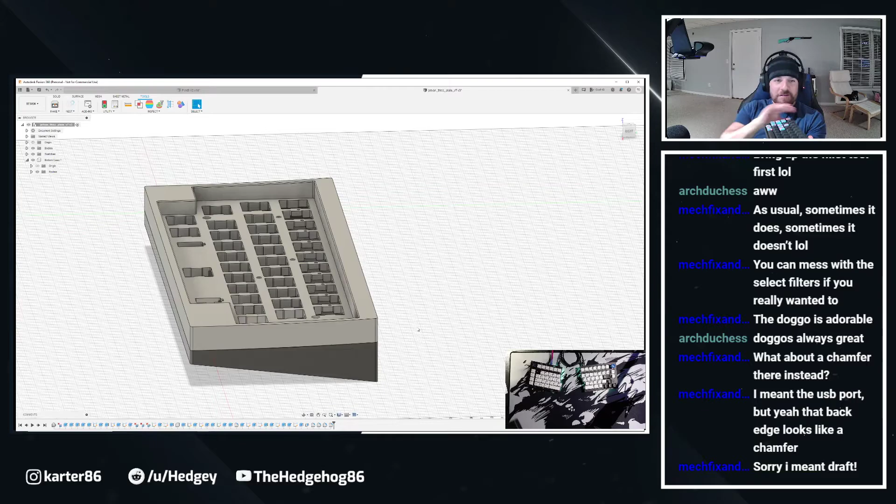Actually, what it looks like is they just matched the plastic as they curved it. Yeah, draft. It looks like they matched the plastic as they curved it.

Let's do this, because I know exactly what the measurement is for the top of the case. That's here, right? Let's go ahead and delete that. What else is referenced there? Oh, the other fillets. That's fine. You can always redo those. It's not the end of the world.

Oh, because I'm an idiot. I mean, I could... Where did we say this one was? So I could roll back, right? Yeah, okay, and then do the draft here and then move forward again. And it should update everything, right? Still learning a lot of this, as confident as I feel.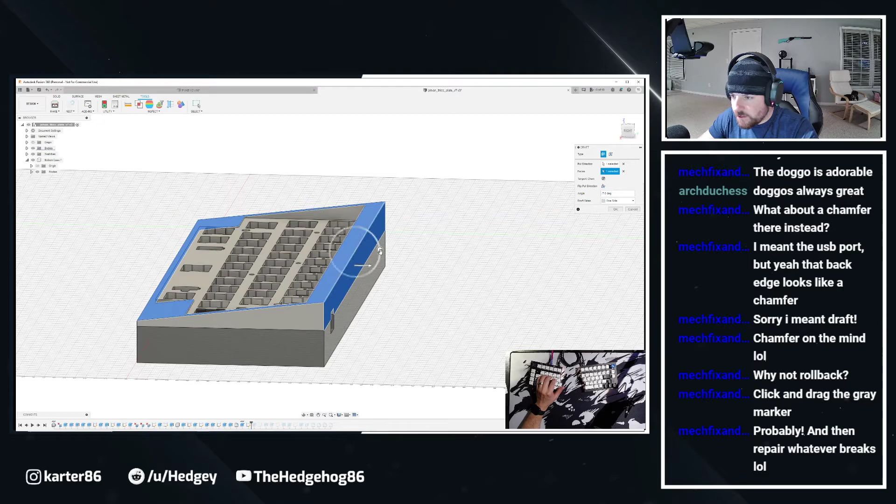Then repair whatever breaks. Yeah, I've heard that a lot. Whoa, way too much. And that's not what I want to do. No, I want to... Hold on.

Nope. Then it's the underside, isn't it? I always get these parts wrong. There we go.

What angle's that at? Is that 7 degrees? This is not 7 degrees. I don't know what... I need a compass or whatever? Is this 7 degrees? No. It's got to be like 5 or less. Although that kind of looks right.

The eyeball test, right? It's a little less, it's like 5 degrees. Yeah, I'm too lazy to do that. Sorry, let's do 5. Hit OK.

And now you're saying I should be able to roll back, right? Yeah, it's a little broken right there. Oh, did it fillet again? No, okay, didn't fillet it, but...

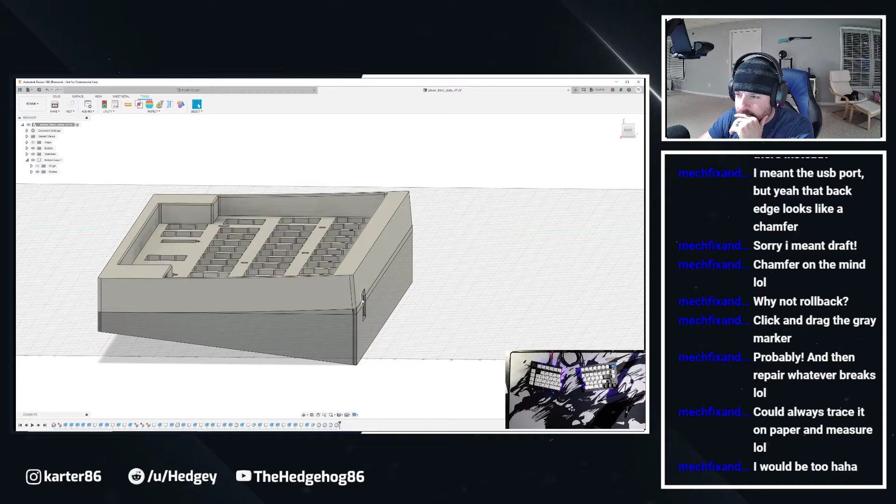No, what happened here? Need a good way to fix this. Guess we can extrude the backside, right? We could take this and extrude it to object. That's not right, though.

Help me out here, mech. Delete might be the move here. It looks like, yeah, the bodies are colliding. So you're saying delete the, go undo, delete the tangent arc, keep it where it's at in the timeline, and then do the draft and then redo the tangent. I think that's the answer.

And at least you can undo everything. So now we can roll back. Yep. Alright, so let's do this again. So now we want to pick this. We're gonna delete this.

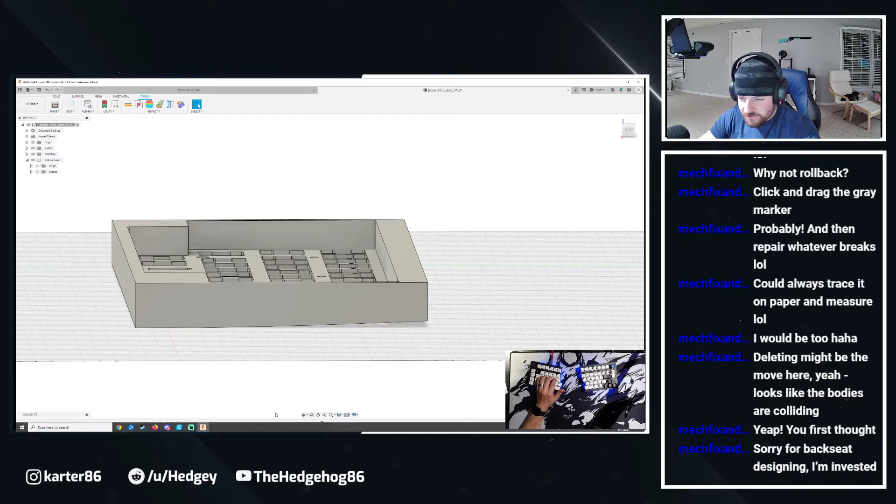No, mech, I appreciate it. Don't be sorry, that's okay. Let me make sure I got this right. I think it was this one. Yeah, that was the sketch. So we'll delete that for now, and we'll come back and we'll redo it. So we're good, I don't mind the backseat. I need the help, I'm happy to get it. And like I said, we didn't really lose out on that much.

So let's get rid of the body here. Oh, that was the issue though. Okay, so this is still, I don't think I can draft from this side. Right, because this is curved too. See, I hate trying to outsmart Fusion.

I hate it, but I already know what I need to do the top case anyway, so let's figure out where that one is. Which one is this? Right here, okay. Delete. Wait, hold on. Delete, yes.

There we go, okay. So now, actually, wrong way. It's frozen.

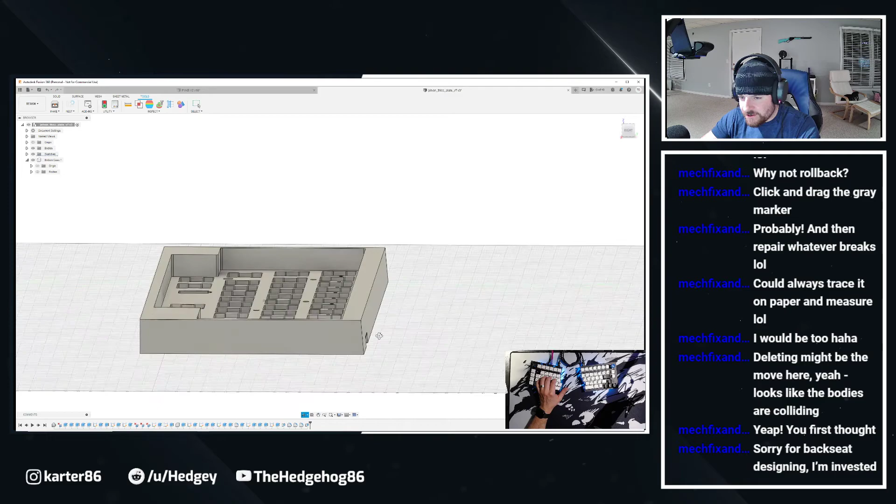There we go. Okay. And so now we can do that whole tangent arc thing again. This should be still 9 millimeters high, which is exactly what I want. 9, okay, let's just double check that the bodies aren't doing weird things. Yeah, they still are here.

Now, if I remember correctly, there's a way to smooth this out, but I'm not 100% on how to do that. That's such a weird... Oh, because that bottom is still filleted too.

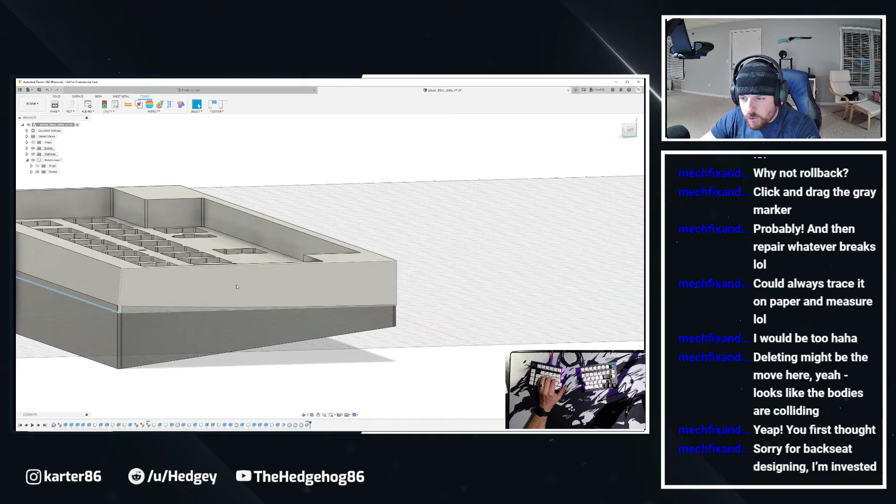What was the move here? Little lost... oh wait, is it because... oh, I'm an idiot, okay. That's because that's filleted, I'm such an idiot. Okay, we're good now. I was not thinking. Some components have been... capture the current position and continue.

Okay, that's fine. And we said that this needs to come 2 millimeters down. There we go, okay, tangent. This should work now, I think. Oop, that's a 3-point, and we're gonna go right to the top right here.

Finish, and we're going to extrude across to distant to object. Okay, and then same thing, let's remove this body for a second. I think this is why I was struggling. But I want to go 90 degrees. There we go.

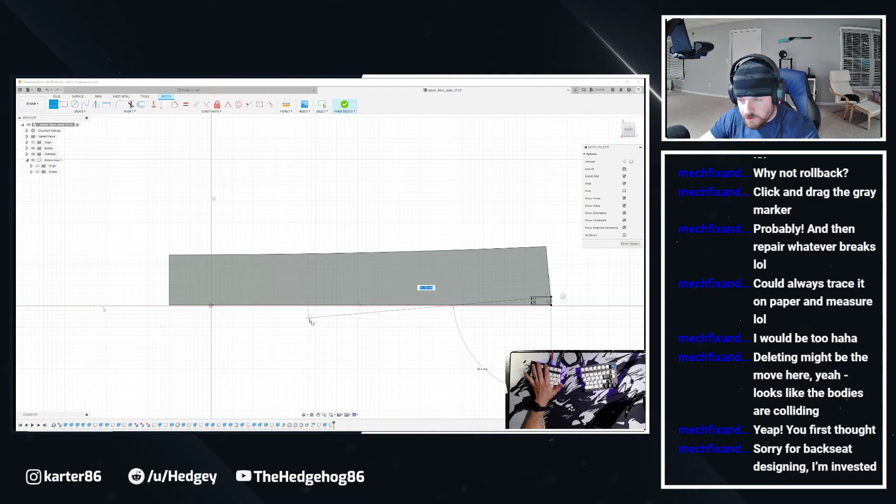Is it not wanting to? There we go. There we go. Finish.

So we're only out of alignment a little bit here. Sorry, my movement is still not great. And we have to fillet this, and then we can try and clean this up, right? I think that's the move here. What did we say, 0.75? Okay, but this should be in alignment, and that's not. That's the concern.

God, that all got real funky in there, mech. I don't understand why. That's so strange. Can I extrude that to this? What's that do? Yeah, I can't compute. Okay.

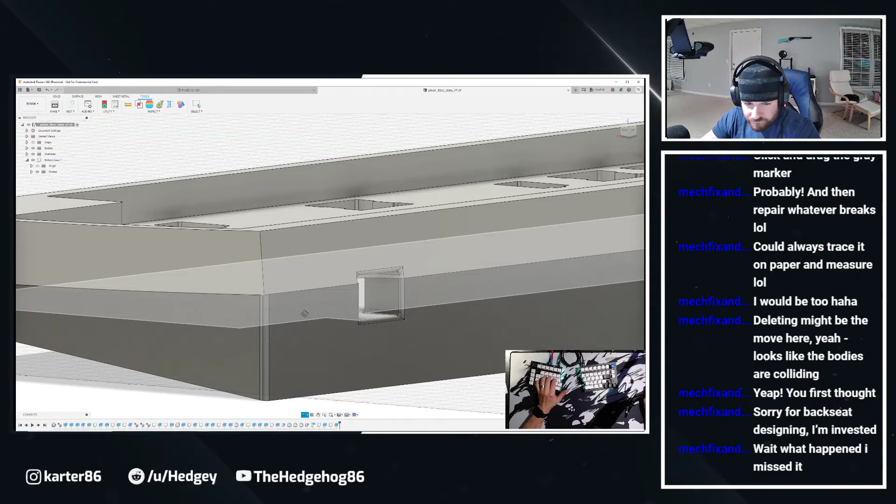So I drafted this. That should be lined up. Let me fillet these corners. I think that'll help with some of what I'm seeing. Oh, and that's why I shouldn't have done the draft either, because I didn't put screw holes in this yet. All right, I'll figure that out.

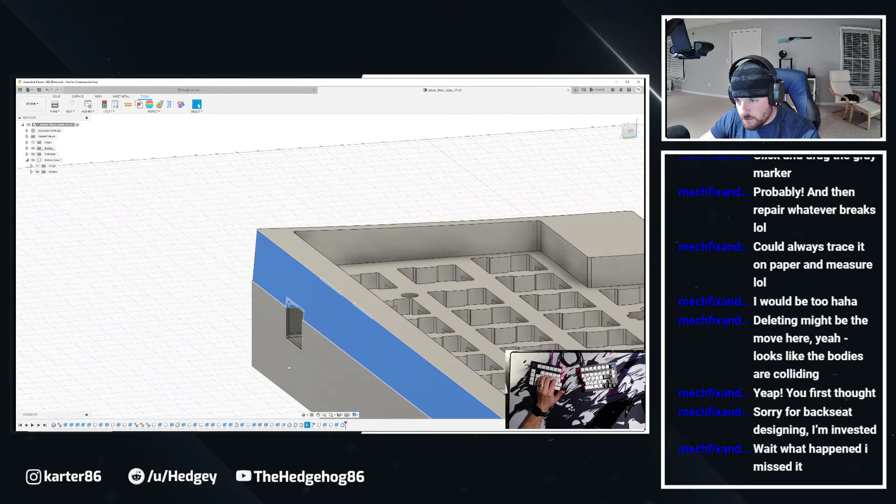1.75 is too big, 1.25. Yeah, this weirdly is not lining up. Especially right here, I don't know what's happening on this backside. Did I miss? Did that draft really just screw all this up? Like, is that what the issue is? Like, I almost want to just delete that.

That was so strange. I may come back to that draft, which is fine because I need to create screw holes too, but I don't know how I ended up with whatever this is. I have two lines here. Is this just Fusion being weird?

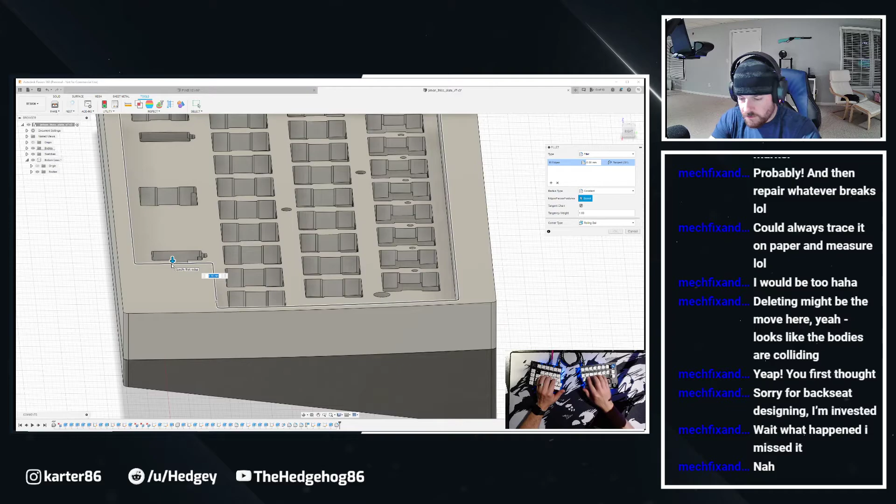I have no idea what's happening. I mean, I'm pretty happy with the case as is. We're missing the fillets from the top and the bottom though too. But man. Something happened, that's so weird. Huh.

There's an interference tool that you can use to check the bodies are colliding. Well, that'd be cool.

Did I do that right? What is that? Oh no, that's the bottom line. I know that OG has that draft. I may just avoid that draft on the back of the case because that's really a pain in the ass. And I know these screw holes are going to be a pain in the ass too.

Hold up, a link to how you use... hold up, a link on how to use it. Oh, pull up a link.

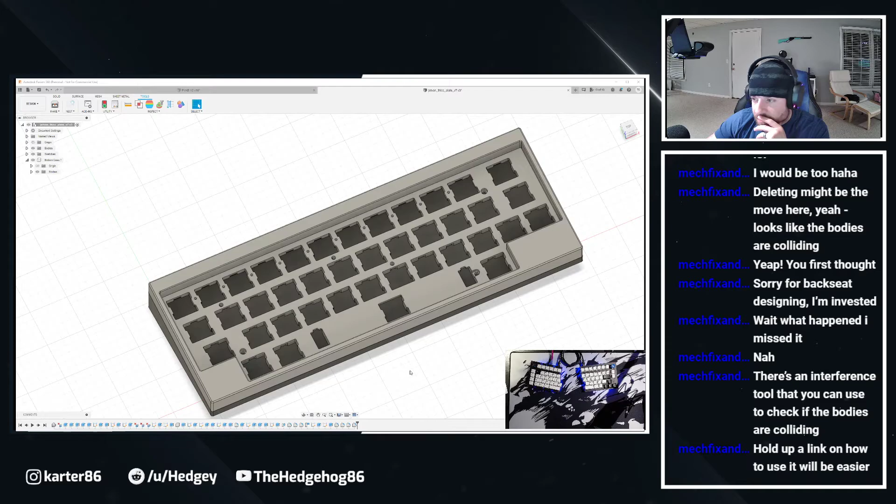Yeah, I'm gonna stop here for now. I'm gonna come back to this. I think we made really good progress for how quickly we got here.

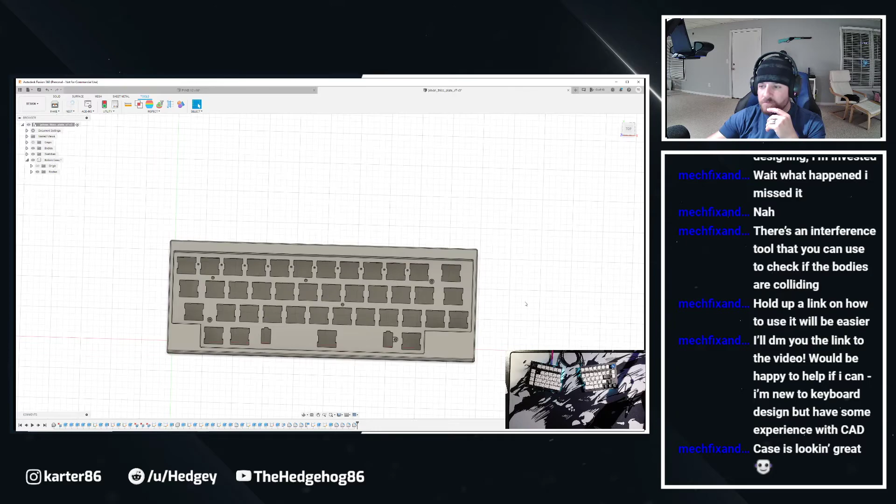Oh, I'll get around to it. I'll figure out what's going on in the back of that case. That's so strange. Everything was fine until I started screwing with it.

Arch, thank you. Yeah, I'm excited too.

Hopefully I can glue V1 of the case together and show you what the bottom looks like. I think I smushed too much of the support material, I can't scrape some of that off. My fault, I screwed up a little bit with my printer. There's still a lot of support material that I can't get off here, which is supposed to be easy to come off, and it doesn't.